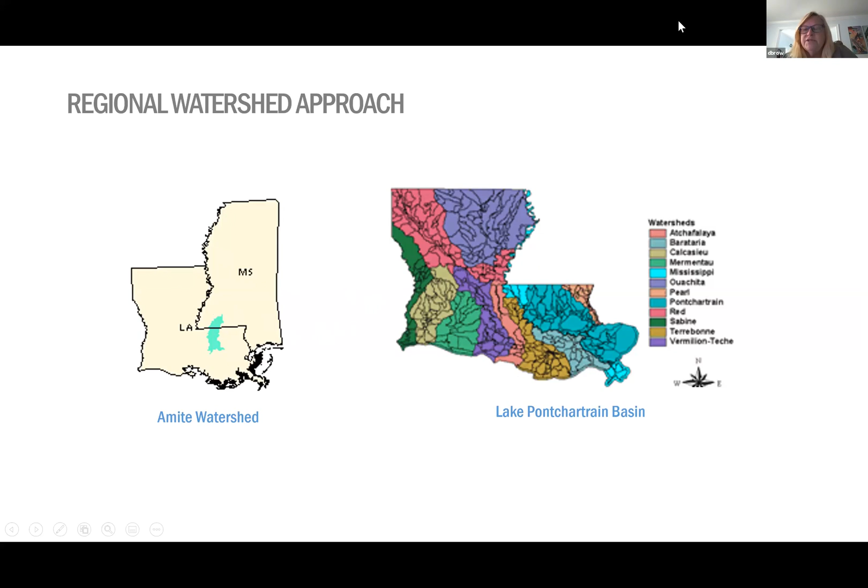And also that we're pumping into Lake Pontchartrain at the same time that Tangipahoa River, Tchefuncte River, Bayou Lacombe, everybody's draining into Lake Pontchartrain. So everybody's trying to, at the same time, that we're all having a storm, we're all trying to dump everything into this one water body, while at the same time, the entire basin is trying to drain into this one water body.

And if there's a storm surge or even high tides, that in itself can be a problem, and we never seem to talk about that. But I like to think about that big picture as well.

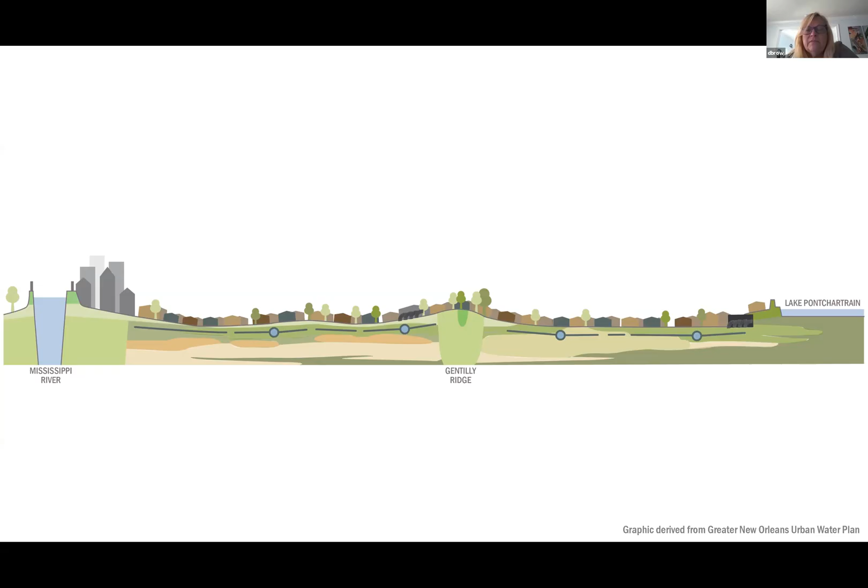And then I wanted us to see, just remind us, we all know this, that we're one of the reasons we're in a bowl is because we've walled ourselves off with all of these levees. And so they protect us, but they cause other kinds of problems.

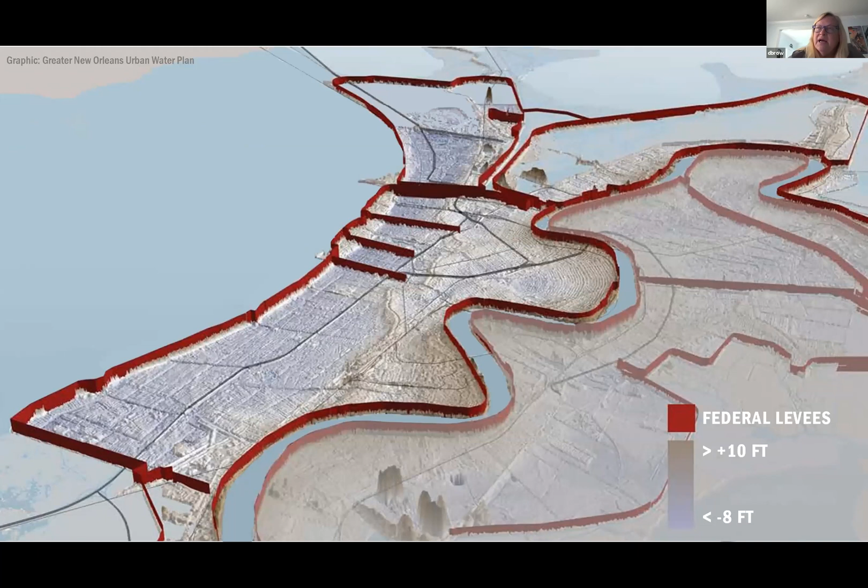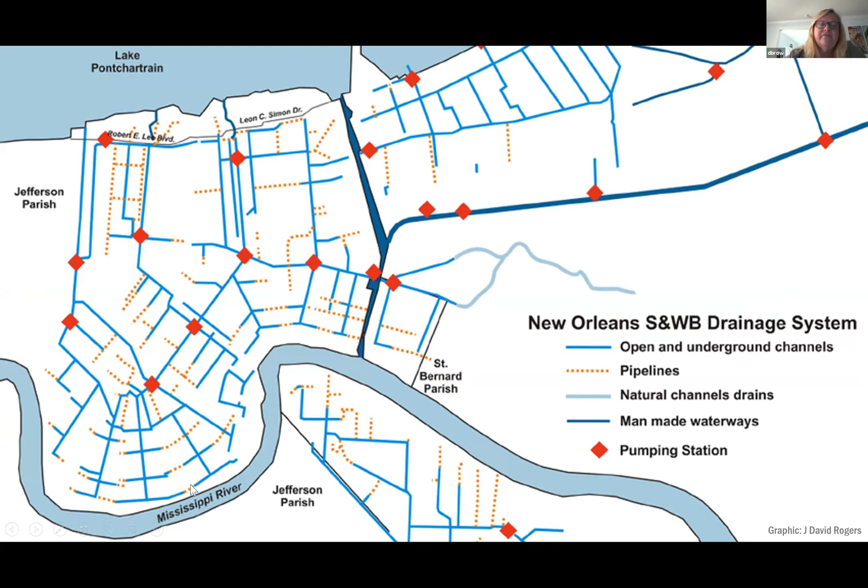Part of that is a disconnect, a lack of awareness of water, difficulty getting to water and seeing water. And then we have our elaborate Sewerage and Water Board drainage system here in New Orleans. I took out a slide showing how many miles of pipe there are, but this is just showing the main pipes. These diamonds are pumping stations. Interestingly, except for a small exception, we pump everything from the river to the lake. That will come into play in a bit.

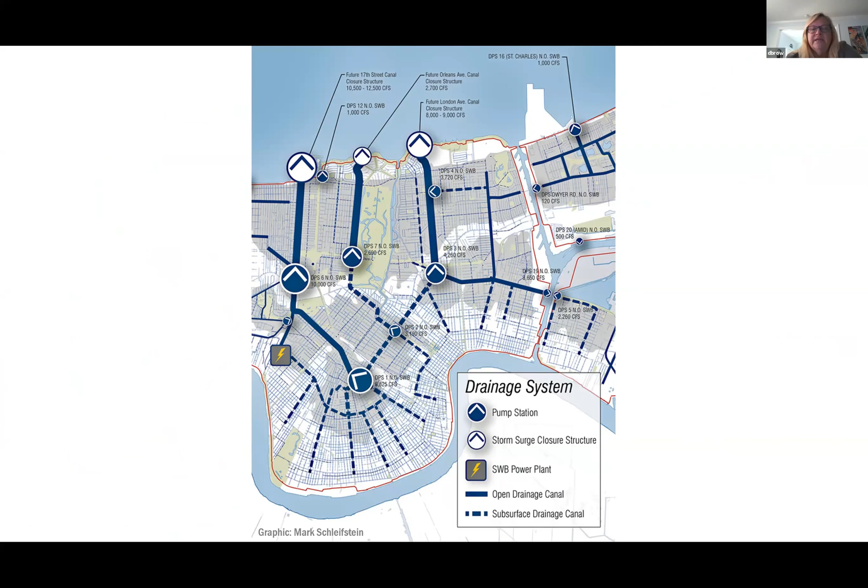Here's another diagram of that, and you can see all the little pipes in the thin blue lines. It's an amazing piece of infrastructure, but it's also not very handsome. I'm being polite - it's powerful, it can be awe-inspiring, but it's not aspirational in any way. It doesn't make me feel rejuvenated. It makes me think, wow, we spend all that money on such ugly looking stuff. Does it have to be that ugly? But then, I'm a landscape architect.

I didn't introduce myself - I am a landscape architect and a certified planner. I went to LSU for undergrad and graduate school in landscape architecture, and also graduate school in landscape architecture at Harvard. I've been doing this work for 41 years, and I'm from New Orleans, born in the Upper Ninth Ward.

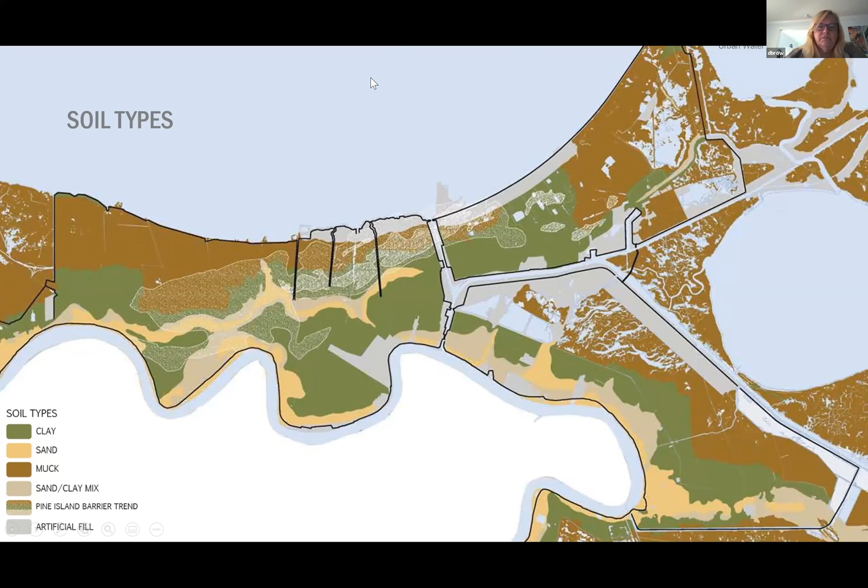The peat layer, being organic soil, has a great opportunity to subside. So our soils are clay, sand, and organic. We do have those little ridges or trends of sand. A lot of it is clay, but a lot is peat or organic material that, when exposed to oxygen, chemically reduces in size, not just physically. Clay soil is more like a sponge - it's your kitchen sink. You haven't washed dishes lately and it dried out. Now you wash dishes again and when it gets wet, it expands. Clay does that.

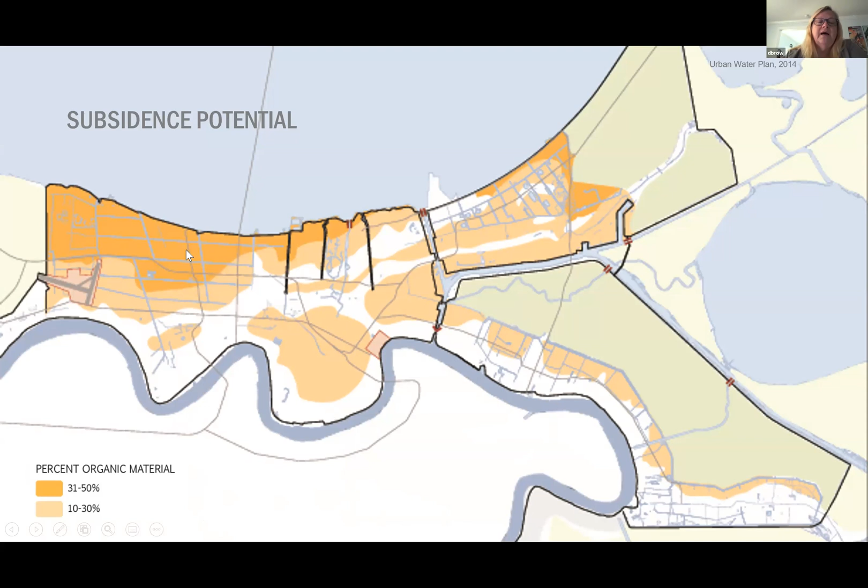So in a 10-year storm, we've been getting 10-year storms, several every year, and 500-year storms and 100-year storms. I hope everybody really understands how much the changing precipitation intensities and frequencies are, it's just phenomenal how much it's changing. All of our models are still based upon what was mapped on an isopleth map about 80 or 90 years ago. Hopefully NOAA is looking at coming up with new maps that show what a 10-year storm is in each area. Here, the first hour of a 10-year storm is about 3.5 inches of water, and 24 hours is about 9.5 inches, plus or minus. This morning we had 4 inches of water in 1 hour, so it was greater than a 10-year storm.

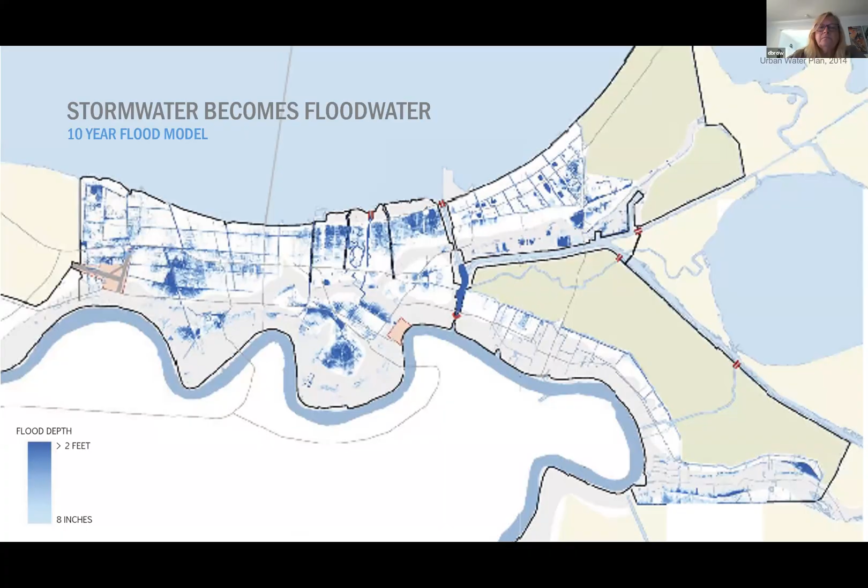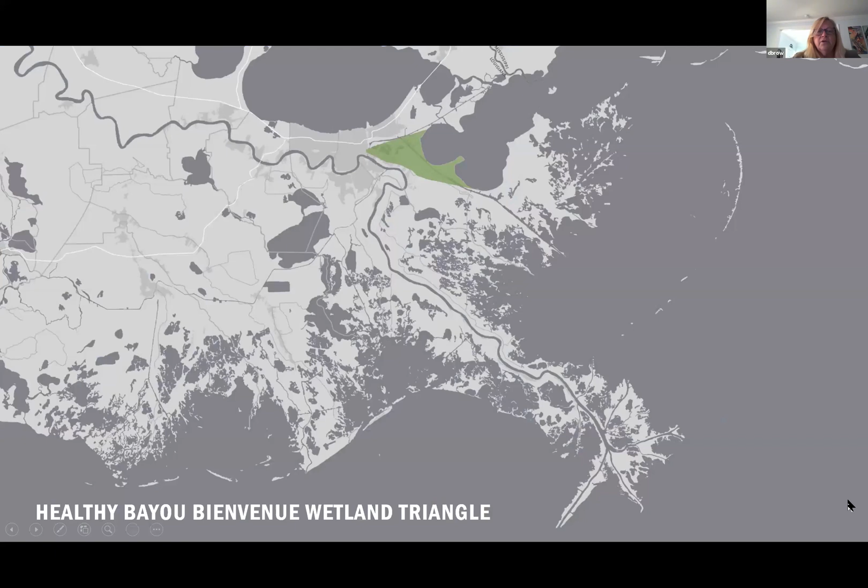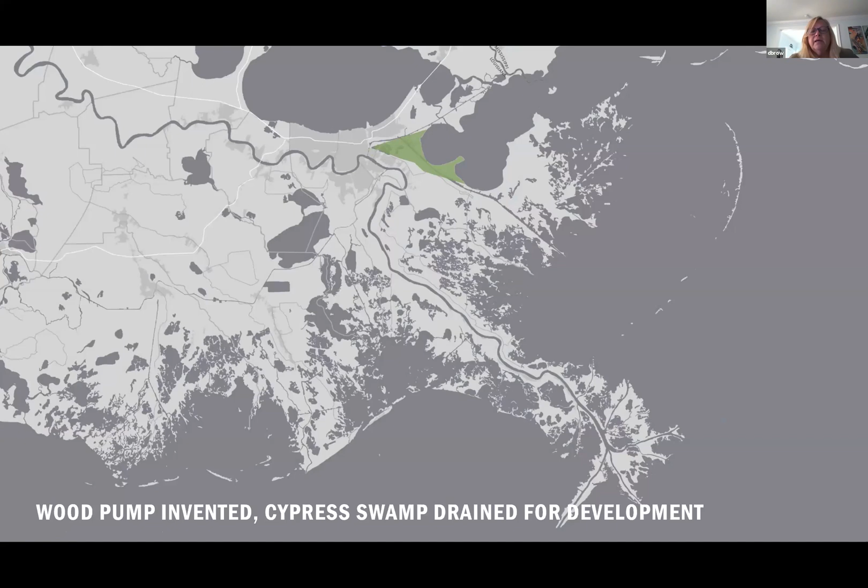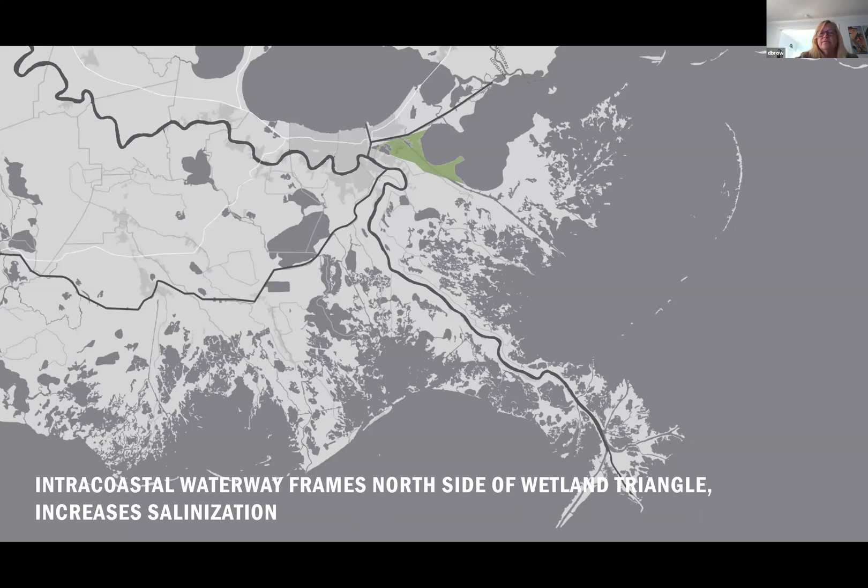Just a little context, and I'll do this quickly. We had Mississippi River distributaries, and I'm sure other people presenting to you will cover this in a much better way than I would. Then we added the levees that ended the distributaries. I wanted to show you Bayou Bienvenue and what it used to be, and a little history about it. There's the healthy wetland triangle that was up there. Then we started to pump because they invented the wood pump, and the cypress swamps were drained, and they started to levee the Mississippi River, and the canals and other waterways were built that increases salinization.

Pardon? I think we had somebody just joining in with us. We do have a question though in the chat. If I can stop you just for a second.

Dana, I apologize, of course my dog was going to start jingle belling all over the place. So we have a question that says, can you explain historical reasons why we haven't implemented more pump to river, and whether or not that's even a good idea?

No, it's a really good question. We don't pump to the river because primarily it's higher. The river's higher, and then on top of that is the levee. So the cost of getting it up over to the higher ground and over the levee is expensive, because the higher land is at the river, which is different than, say, the North Shore. The land along rivers there is the lower land, but here it's the higher land because of the sediment that used to be deposited along the river when it overflowed its banks. That higher land then naturally slopes towards the lake. So it would make sense in a lot of ways to drain to the river where it's closer, but you're still pumping uphill and then over the levee as well. That's the main reason why.

The Mississippi River has, since at least 1927, been thought of as the threat to us. So it's very difficult to win any kind of concept that involves penetrating that levee wall or levee, does that make sense? Flood wall or levee, but that's why. It was natural drainage mostly, and then we started putting in the pumps. The fear of the Mississippi River made us not want to touch that. Plus, Corps of Engineers is always fun to work with, sorry if there's someone here who works there.

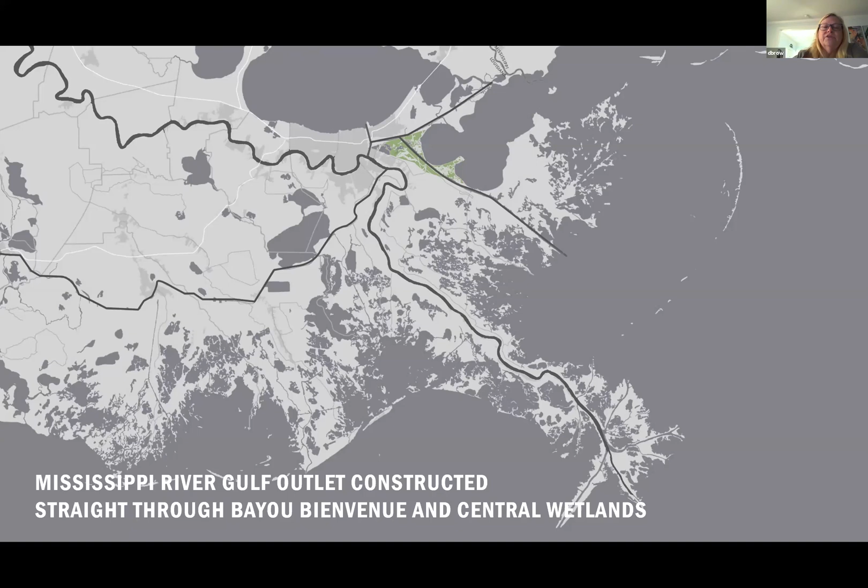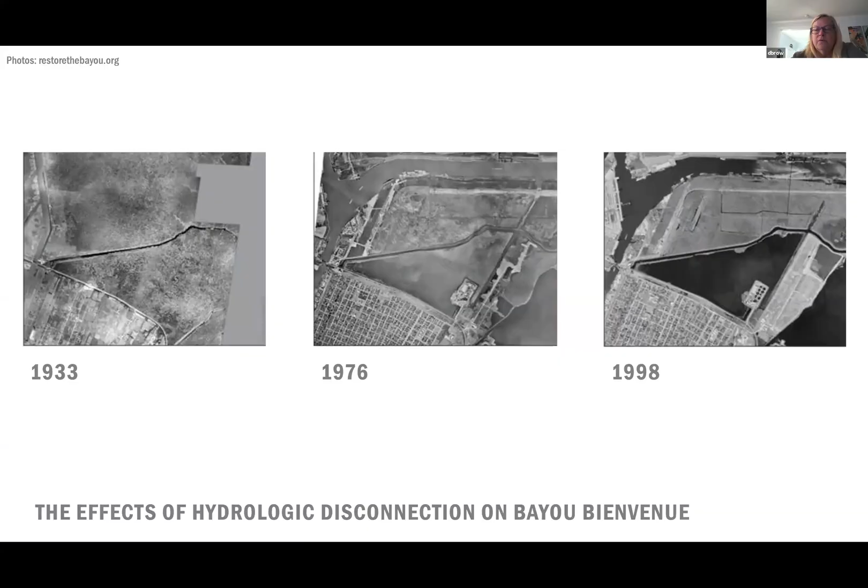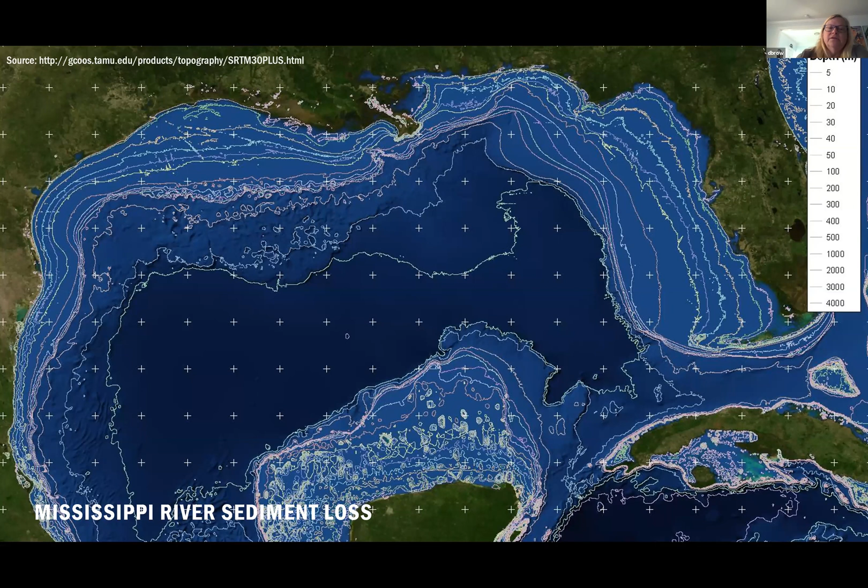Anyway, look at the green in Bayou Bienvenue and the central wetlands and how much they degraded. Here you can see a series of pictures, 1933, '76, and '98, and you could see it just disappeared, it's like we've got the receipts on what caused it. That's the hydrological disconnection that I want to make a theme of some of what we're talking about today. That freshwater supply loss meant we then started losing that natural sediment to the end of the Bird's Foot Delta and depositing all that great sediment into the Gulf instead. You can see it really well here. Then the saltwater intrusion kills cypresses and a lot of the habitat there, so that happens when you're not flushing it with fresh water.

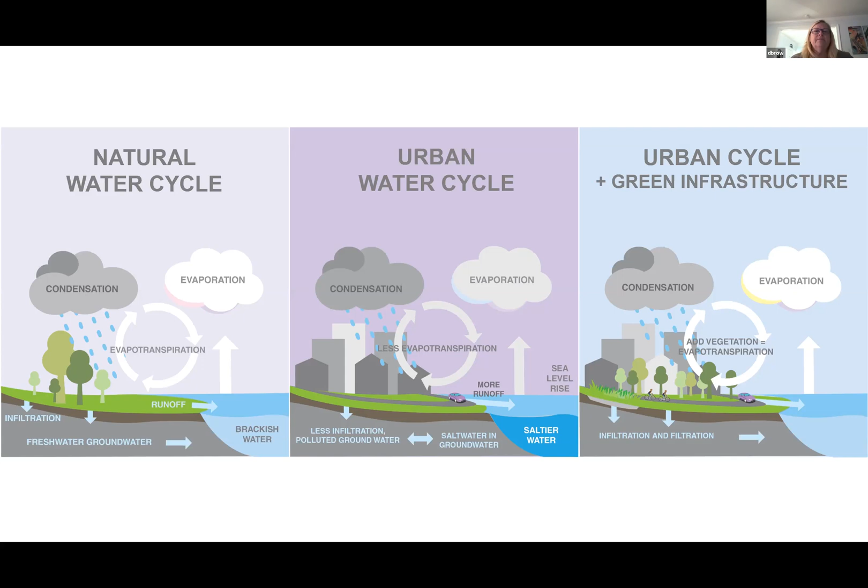So we need to be a lot more aware of this. People don't know that if I took this whole screen and said that represents all the water on Earth, I would probably take about a half square inch and say that's the amount of fresh water available to us as humans to live and fertilize crops and, unfortunately, operate industrial processes. We use fresh drinking water for that as well. People are usually not aware of that. It's something to think about.

So natural hydrology, I don't want to dwell on it, but you just have to think back to 8th grade. There's a lot of evapotranspiration, but it's a cycle.

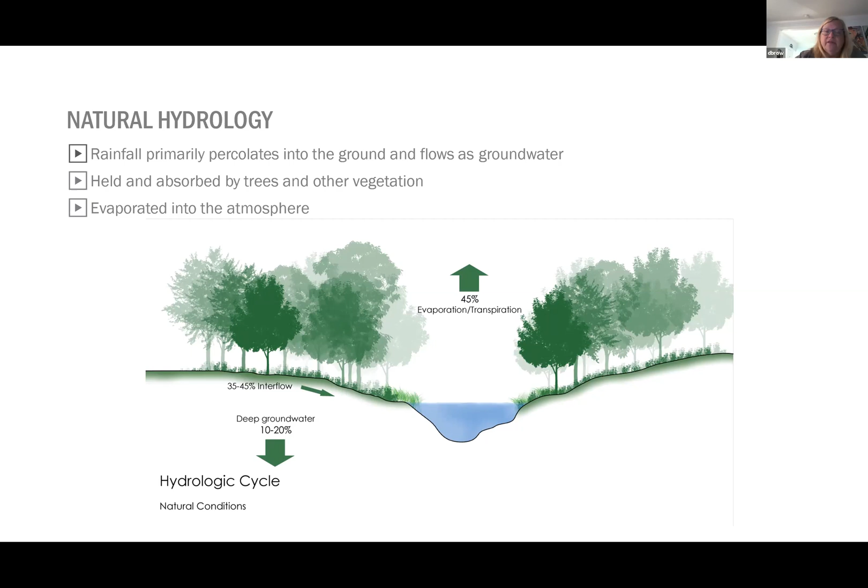That's the main thing. And the traditional approach, instead of having these natural kinds of banks of rivers or bayous, we have these canals that we concrete line, then we put up a fence, because the way we did the trapezoidal channel design, it's unsafe. If you fall in it, you probably can't get out and you're going to drown. So we have to put up a fence.

It's just like we keep doing things about drainage with blinders on. The only purpose of this canal, as it's designed right here, is just to hold water and move it as fast as possible. And we don't care about anything else. That's a very myopic way of looking at our infrastructure, but that's how we've been doing it for a very long time.

And you clear out vegetation, and they don't want any vegetation because that's going to slow the water down. A lot of times it's concrete-lined and impermeable. Looks beautiful, like Monticello Canal, just beautiful kinds of infrastructure - that's my sarcasm, if you can't see my face. And no percolation in the ground increases runoff even more.

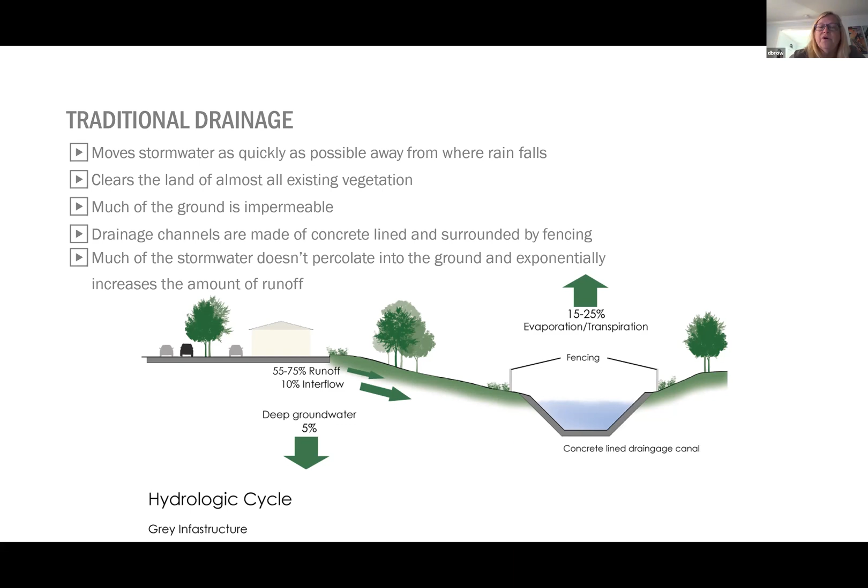So the traditional approach, right? Same thing, even right at your house there: get the water off your property, get it into an inlet and into a drain, and get it into that canal or some other kind of water body.

Here's a couple of important things, and I'm going to get into one of them a little bit more deeply: with the kind of rainfall we have always had here in this region of the country, not to mention how the intensity has increased and the frequency is sort of very unpredictable - more drought, then lots of rain, lots of rain, lots of rain, then drought - we can't afford all the pipes and catch basins and pumps it would take for a traditional approach to be effective. We can't afford that. We've proven it because we can't even afford what we have now.

And plus it's ugly, so we don't want to do that. The environments that it would create would be incredibly ugly. And again, I believe very much in a human's environment having so much to do with how they are able to function in the world, whether it's on a daily basis or in a bigger picture. I'm not going to get too philosophical on you, but we could have coffee another time and talk about it.

But words matter to me a great deal. Words matter. And engineers - I've worked with engineers who totally get this and have changed their ways - we're all trying to change our ways because we all looked at it the same way: there's some ponding on my property, I want that water off of my property, get it out of here, there's ponding, there's water getting up to my steps. And I always ask, well, is it in your house?

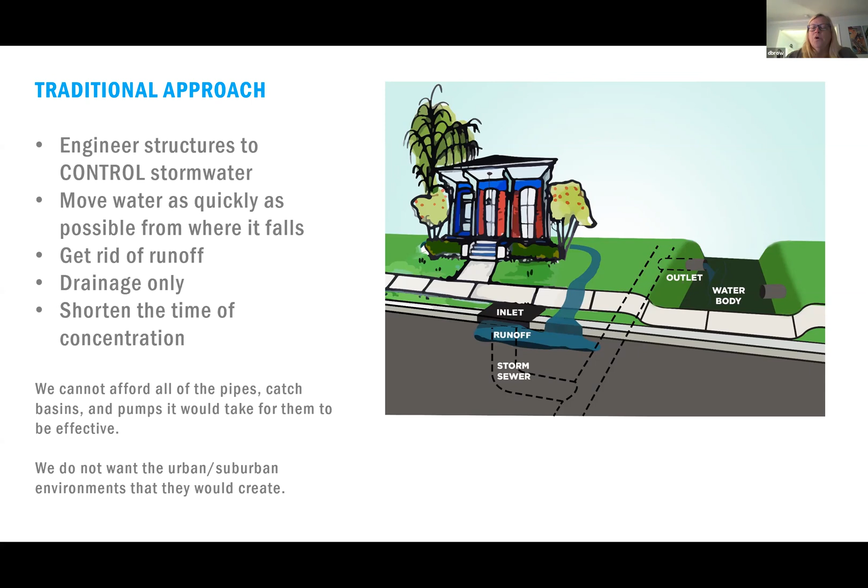So instead of moving water as quickly as possible from where it falls, we want to hold the water as close as we can to where it falls. So that's where we come into stormwater management, and I liken it to having children.

If you have children, you really don't control them. You may think you do, but you don't. You really manage your life around them. Like, okay, he's got to go to Little League practice and I've got to bring her to ballet, I've got to do this, you're just running around like crazy trying to keep everything working properly. That's what stormwater management is. It's more flexible, and hopefully that'll be clearer as we go along.

But you want to use natural systems as much as possible. Maintain existing trees instead of doing what we typically do, particularly in suburban areas where we clear cut everything. And like we've got this blank canvas now? Yes, you've got a blank canvas where you totally destroyed the existing hydrology, and there was existing hydrology, existing vegetation, and soils. And all three of those...

...contribute to managing water better. You need to minimize impervious surfaces. There's no reason why, every time you look around, the standards seem to change, saying that the road lanes have to be wider. Somebody gets in an accident, so oh no, oh my goodness, let's make the road lanes wider. And now we're using highway standards on local roads.

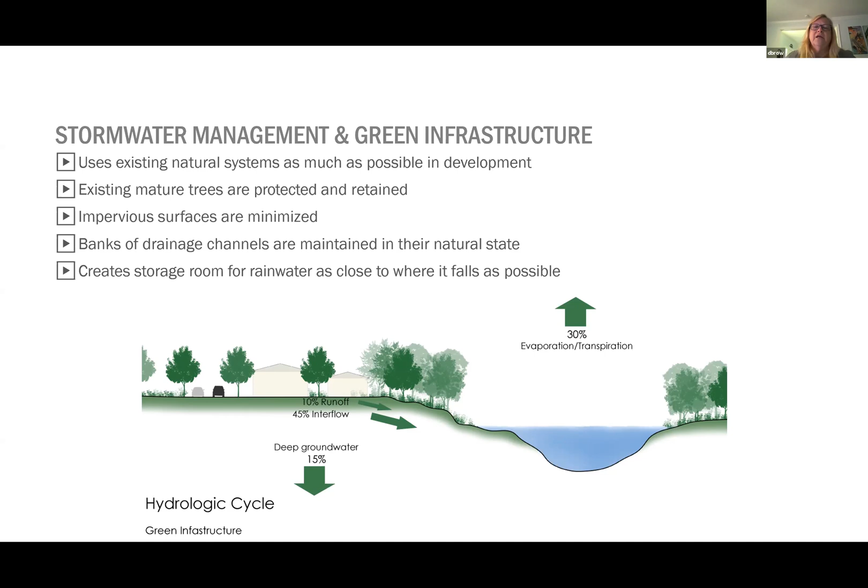And you want to maintain drainage channels, or man-made ones, in more of a natural state instead of an engineered, artificial state. You're really trying to create room for water as close to where it falls as possible. That is the cheapest thing you can do and the most effective thing you can do. And when do those two things collide? I mean, come together? Rarely. Is the most effective thing also the most cost-effective thing?

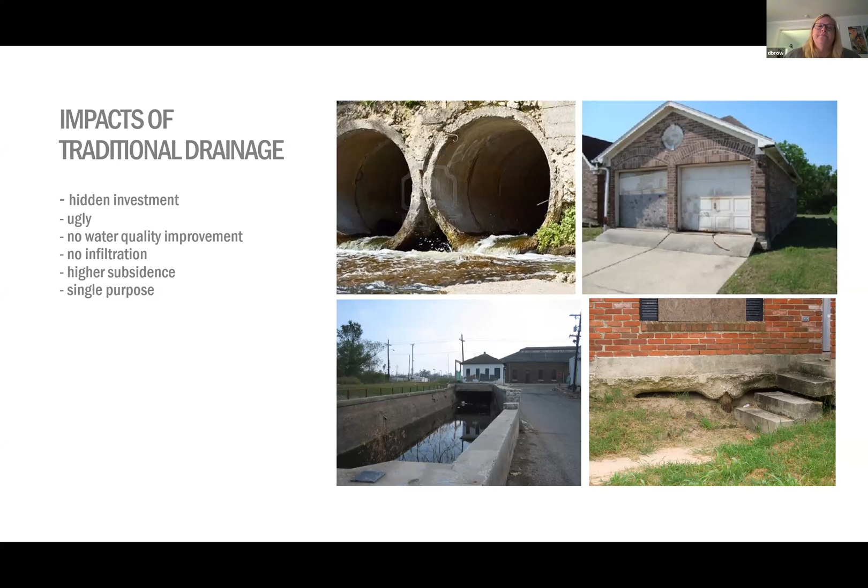So here are just some of the things you know already. Here's some subsidence and the ugly infrastructure. And the reason why the subsidence occurs is not only because we're not putting the water back in the ground. A lot of times we pump too much and we keep pumping, and we're actually sort of vacuuming the water out of the soil, and that's going to cause the subsidence.

And the cost comparison to fix traditional drainage infrastructure is really incredibly expensive, to build it but also to repair it. One of the main reasons is you can't see what's going on. You can't even find the problem without digging up or putting in expensive cameras to find out why this isn't draining. And then you've got to dig up things to fix it.

Right at this time, I usually do a small skit where I am a clogged pipe, but I can't do that online, so just imagine it and laugh later. But because almost all the infrastructure is underground, it's invisible to us. And when it's invisible, then maintenance needs are invisible. And we all definitely know we neglect maintenance here.

Not every place in the world neglects it as much as we do, but we have to also admit that we are a poor city. We do not have huge revenue sources from big corporations that have their headquarters here, we just don't have that kind of municipal revenue. So what gets neglected is generally what isn't seen, and that just makes repairs even more expensive later.

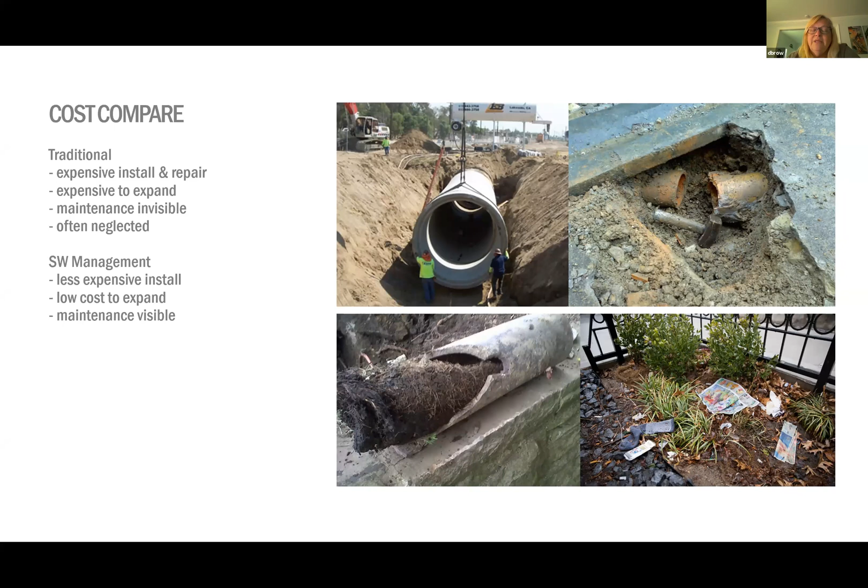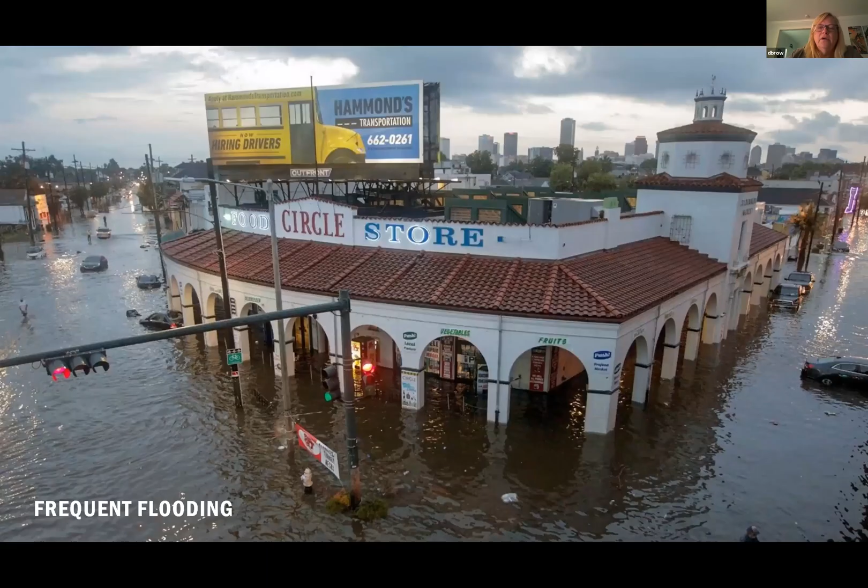The other thing I mentioned, awareness and disconnect. We have these kind of flood walls around our canals, and you can be walking your dog there and you don't even know there's water there. You can't sense there's water there. Part of that disconnect, part of that lack of awareness, that invisibility, also makes us not understand what's really going on with water in this city. Everybody's seen that slide, I'm sure.

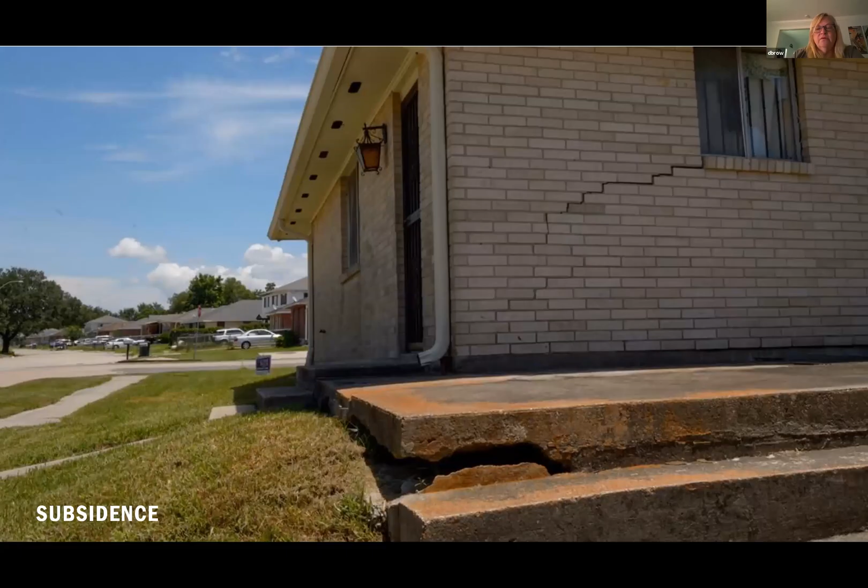But the maintenance is constant and it's very expensive, and we just simply don't do it until there's a problem. And water pollution is a big issue.

If you don't know, when it hasn't rained in a while, the streets, parking lots and rooftops have collected a decent amount of pollutants on a road, a parking lot, or even your driveway. It's gasoline and oil and brake fluids and pieces of tires and even metal engine blocks. I used to fix my own cars years ago, and you know, you had to replace the gasket, take it all apart and put a new one in.

Well, where'd the gasket go? Where'd the rubber go when the tires wore out? Where did all that stuff go? Where did the metal go when my engine block was really deteriorating? Well, it didn't go to Mars, it went on the ground. It may be microscopic, but it's there.

And so it sits there and builds up until the rain comes. And that first flush of rain, we call it a first flush because it's flushing those pollutants off the surfaces of roofs and impervious surfaces of all kinds and collects all of that. And that ends up in Lake Pontchartrain unless we filter it first. And we don't, of course, with a sewage treatment system. That would be ridiculously expensive.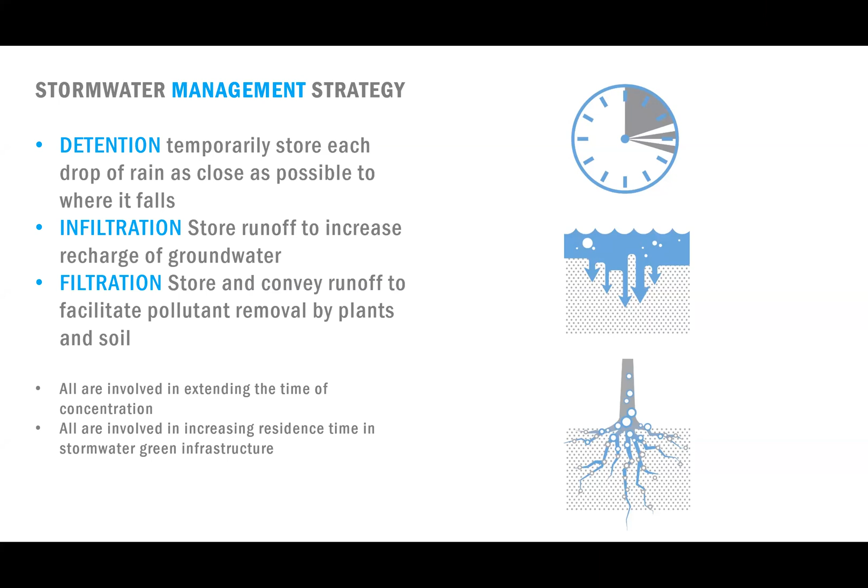And very efficiently, very effectively, it removes pollutants out of that water. But it can't effectively do that if the water doesn't have what we call residence time - time to sit there and be treated, time to infiltrate into the ground. And so if you're detaining water, while it's being detained, some is infiltrated, some is filtered, some of that maybe even evaporates.

So that actually, even when it is released into the pipe system, there's a whole lot less of it, because some of it infiltrated into the ground, and some was taken up by plants. A mature cypress can take - and I've seen different studies - 2,600 gallons of water a day if the water is sent to it. Live oaks can take up even more, believe it or not, if the water is sent their way.

But instead, we generally drain the water away from trees, say in a parking lot, and then we wonder why the trees don't do well.

So what you're doing by detaining is you're increasing residence time, extending the time of concentration. You're holding some of that water back while the other water drains.

The analogy I like to use is the on-ramp on I-10 when everybody gets off work and it's backed up. It's hard to get on the Claiborne overpass or the Claiborne Expressway, and they now have ramp meters at some of the ramps, because everybody's trying to get on at one time. If people got off work at 4:30, and then some at 4:45, and then some at 5 and 5:15, every 15 minutes or so, then that would not be the backup. It would flow better - wouldn't be perfect, but it would flow better.

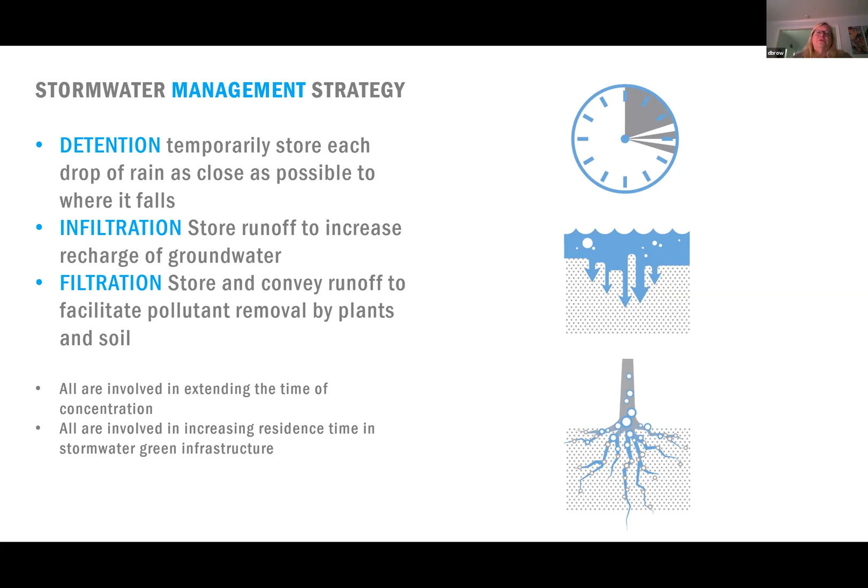Whereas stormwater management, green infrastructure is an open system, and I'll try to bring that home to you now. Green infrastructure mimics natural hydrology. It's detaining the water, so it's not trying to hold it permanently, but some infiltrates into the ground. Plants and soil microbes—it's amazing how well they clean even heavy metals out of water.

The great thing about it is it's applicable at any scale. We're doing some things in a parish—I'm not going to mention the parish because I don't want somebody else to come take my work from me—but we're doing some big projects there. It's big, just areas that are basically open land, and we're going to bring water out of the river onto that land to detain it for a while.

So those are huge. And it's not like the retention basins they do on the North Shore in St. Tammany Parish. I tend to find those to be too engineered.

But you can do it at any scale, or you can do it at this scale right here, where there's a little French drain on the side and then a bioswale in the middle. And there are multiple benefits. This is the most important part about it compared to a traditional drainage approach.

Besides recharging groundwater and therefore reducing soil subsidence, you're increasing urban habitat because you don't use anything but native or highly naturalized plants—or as the Louisiana, New Orleans Native Plant Initiative calls it, sometimes 'nativars.' You use plants that are natives, basically. And plants that are native are adapted here. They can deal with the drought, they can deal with a ton of water, and you've got to plant the right plant in the right place.

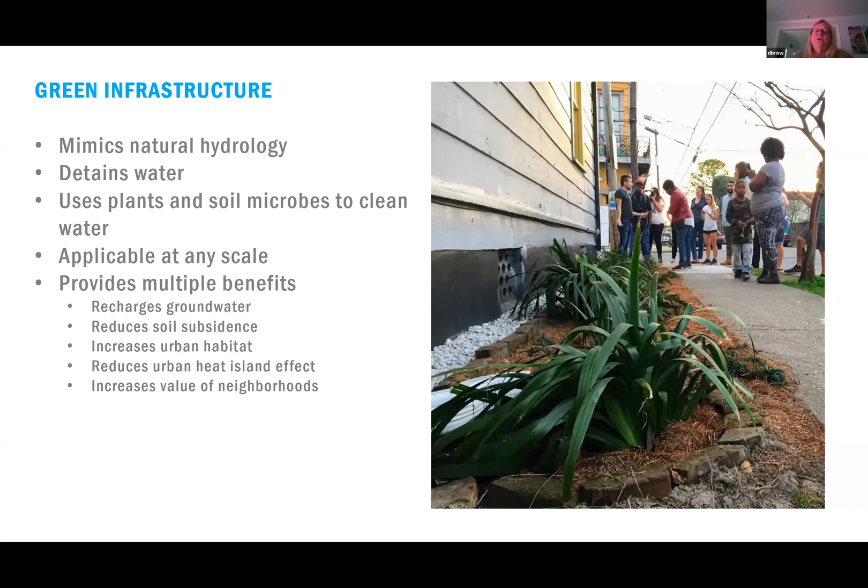And it increases the value of neighborhoods as well. There's other things it does—air quality, plants sequester carbon. It's better for community design and just a sense of community.

You can build it incrementally. I can build a small rain garden and then next year go expand it. If you try to do that with a pipe—say I just put in a 24-inch pipe—the only way to expand that pipe is you got to dig it up and put in a bigger one. And then, what is that pipe connected to? Maybe now the next pipe can't handle it, so you'd have to dig that one up too, because it's a closed system.

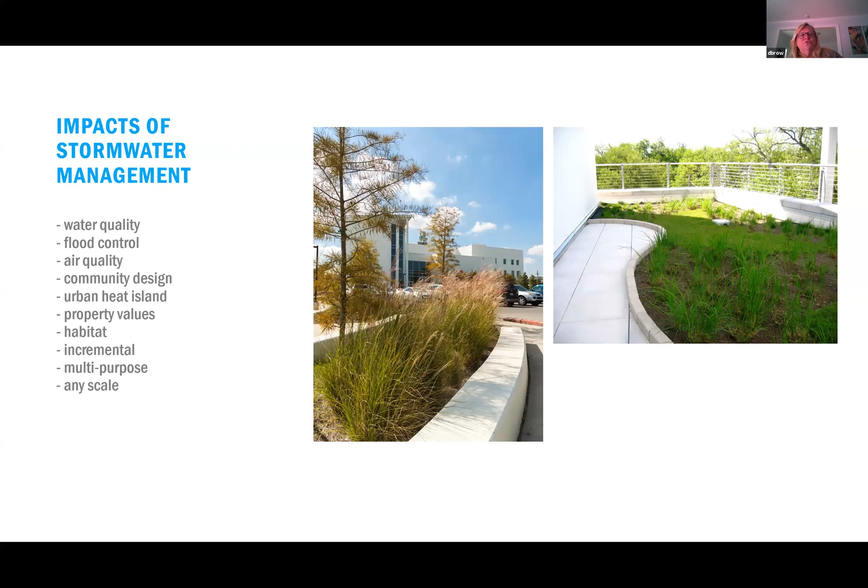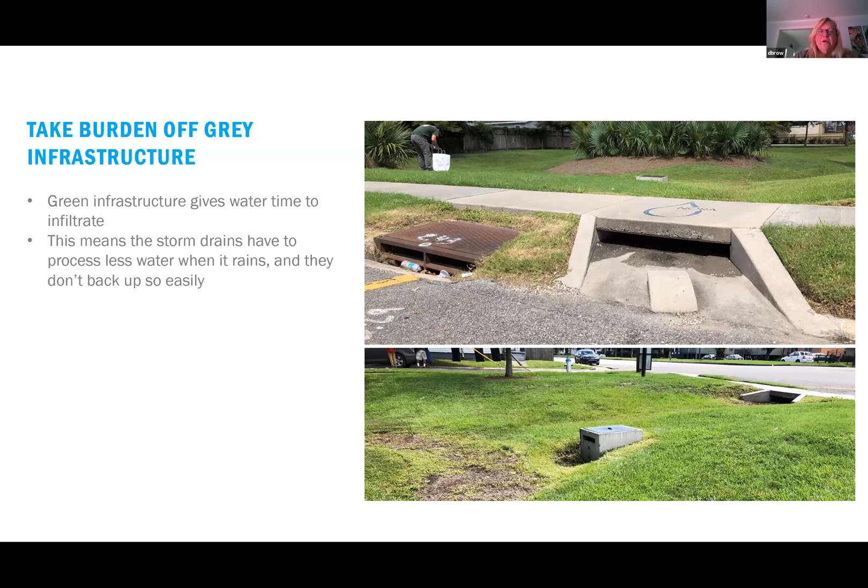What green infrastructure does, it doesn't replace gray infrastructure, which is what I call traditional infrastructure. It takes the burden off of it. Okay, I'm going to show you - it reduces flood risk.

Bioretention cells and bioswales - the bio is that it biologically retains pollutants. That's what the word bioretention cells comes from, and that's what I like to use. We call what we design bioretention cells. They always have an outlet back to a pipe system, whereas a rain garden in front of someone's house or backyard usually does not have a connection back because it's too difficult and costly to connect back.

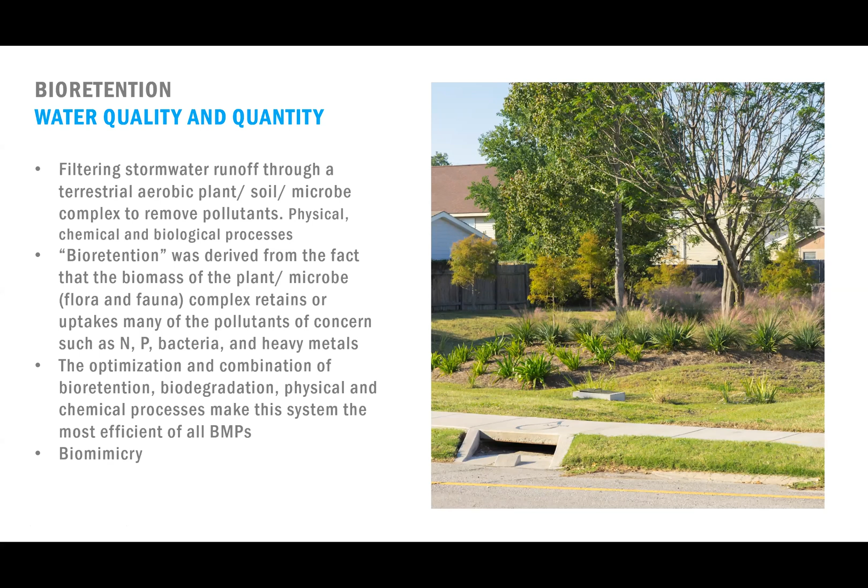If you're interested, there's a book called Biomimicry. The name is listed at the bottom. It's a bit of a hard read, but it's pretty cool to learn about how other things can be used - how we can mimic other things in nature.

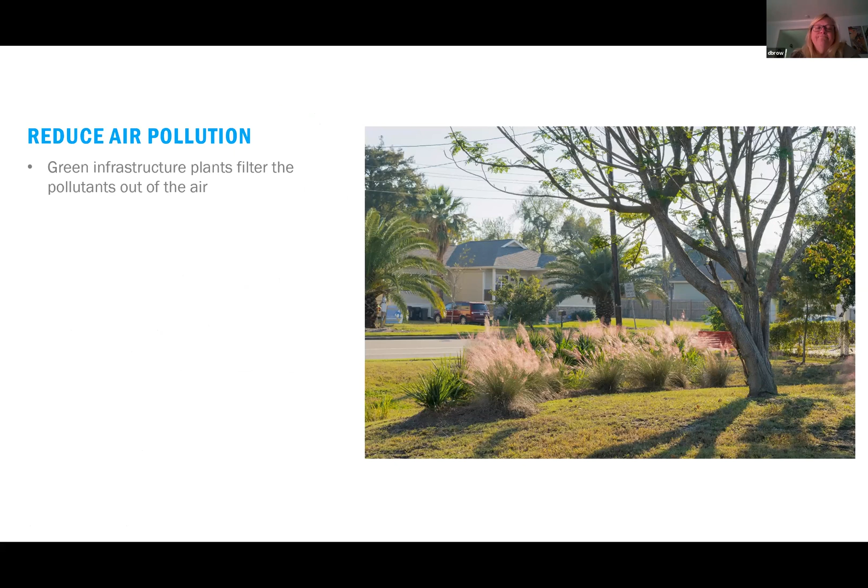Water quality, I've talked about that, the air pollution and sequestering. There's air pollution - look how clean the sky looks after these rains, right? This afternoon, if you looked outside, look how clear and beautiful it was. The rain washed pollution out of the air. Where did that go? It went onto impervious surfaces and once again was flushed out.

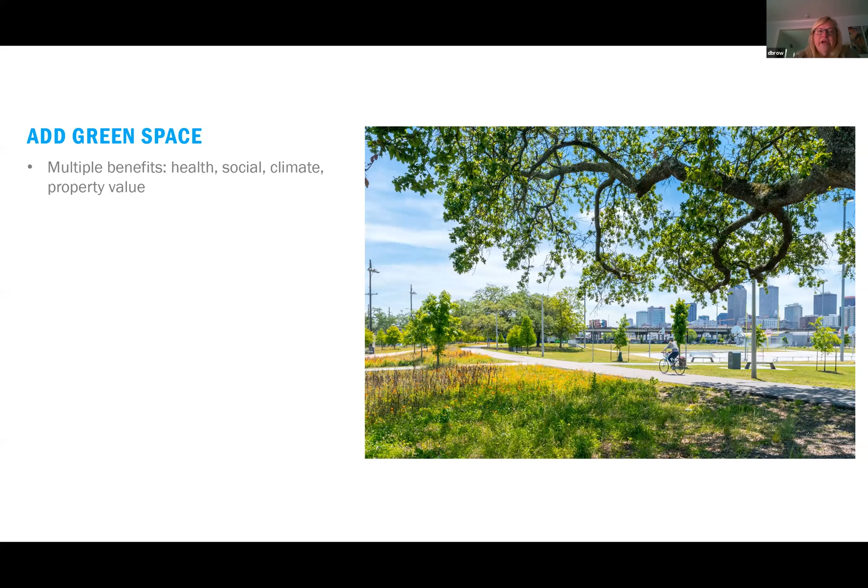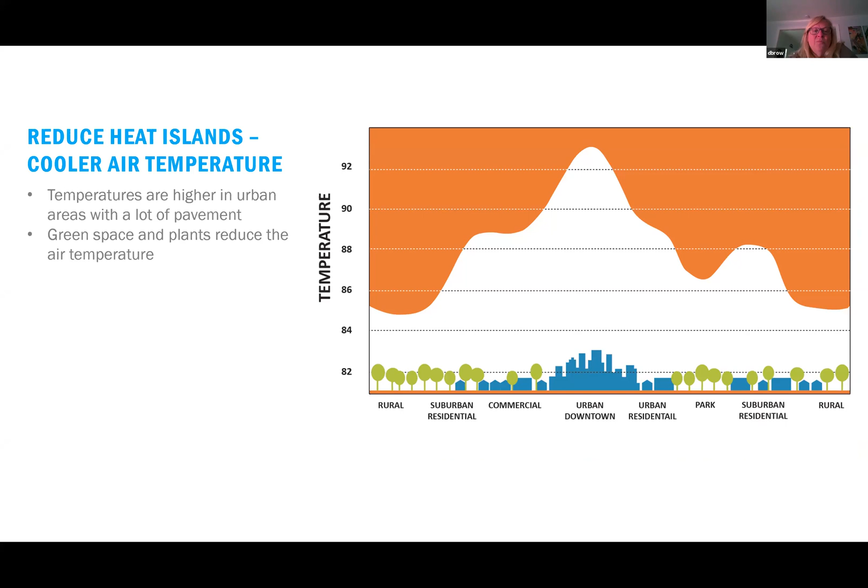Green space has multiple benefits, and we don't have enough green space in this city. We have a couple of really huge areas, but need more green space that isn't necessarily a park, or could be. That's a diagram of the urban heat island effect, where green space and plants reduce the air temperature compared to an urban area.

So let's talk about some types of green infrastructure. I mentioned rain gardens - basically, if you want to know where to put a rain garden in your yard, go look at where the water collects and just put it there, dig it deeper, put some sandy soil with a little bit of compost, and plant native plants.

A bioswale is just like that, but it's linear. So it's actually used to convey water from one area to another, like a pipe, but it's an open system, right? I'm not the biggest fan of detention basins, but I've designed them because they tend to just be grass that gets mowed, and grass doesn't do for water quality or groundwater infiltration what native plants do.

Here on the left is a stormwater planter. I'll show you some French drains, rain barrels. This is pervious paving on the right - that's at my house, I had massive quantities of it put in - and infiltration columns, and then trees.

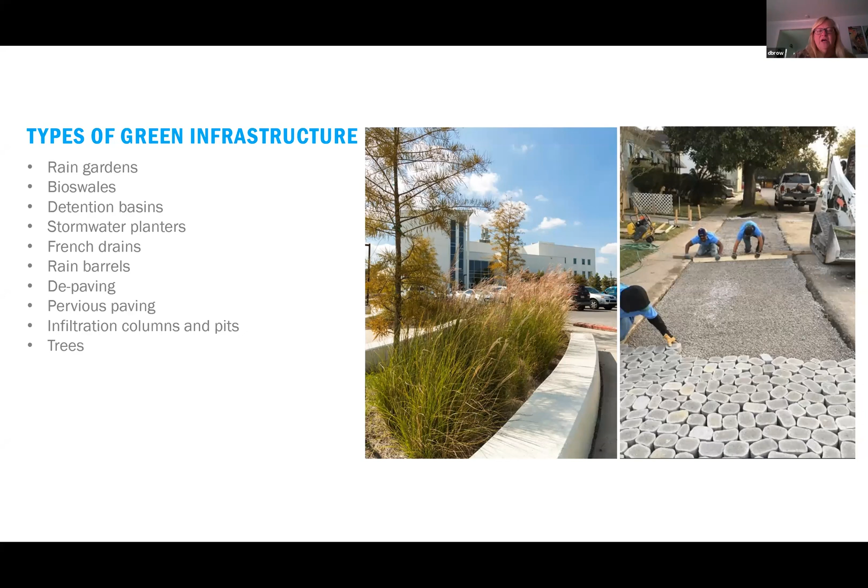So when we talk about plants, we need to think about whether it's a rain garden or a bioswale or bioretention cell - the lower part, where it's going to stay wet more, is like a lower riparian area where you need to pick plants that like that. And there's a middle riparian area and an upper one that might get their feet wet briefly and could handle that. In this rendering it's like muhly grass, but it's not going to want to sit in water.

So native plants also send their roots a lot deeper. Let's go back to our soils, right? We have clay soils here. Everybody says it's all clay soils, and they do infiltration tests - we have to do infiltration tests before our projects are designed. But that infiltration test of how quickly water goes into the ground is at one point in time. It's a static point in time.

When we plant - and my office is doing a lot of tests and monitoring on this right now - when you plant native plants, their roots get deep right through that clay soil. They pipe through it with their roots, which brings air and water into the soil, and it fundamentally changes the characteristics of that soil. It also attracts microbes, and so now you have a higher infiltration rate. I can't seem to get people to understand that one, but I'm going to prove it one day, with data, but that's what's happening.

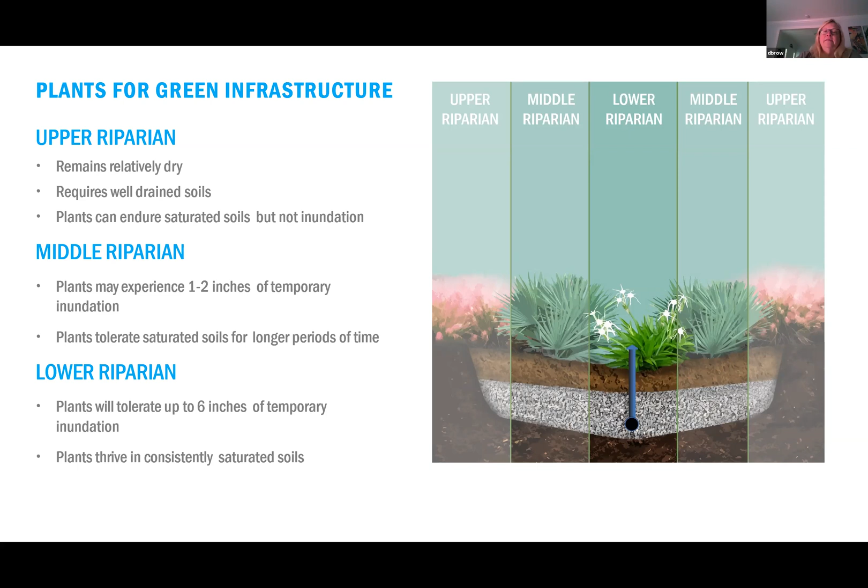So that's in my house, that rain garden. What I want to point out is along the side of the house where the downspouts are is a French drain. It has a pervious pipe toward the bottom, and that bends and dumps into this rain garden. So I'm getting the water off the roof and putting it in the rain garden, and then other water flows into the rain garden as well.

Native plants, and that's a red swamp maple, my favorite tree in all the world. There it is again on the right. Here's a different one on the left.

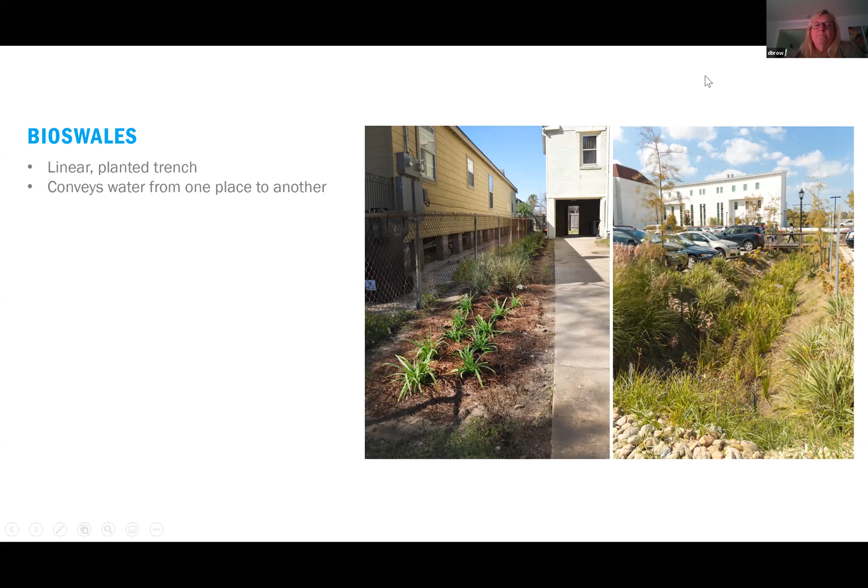This is a bioswale, remember I said it's linear. This one on the left in the back, those are in the native palmetto, and we built this five years ago. Those native palmettos are huge now, they are so happy. The house on the left was draining onto the property on the right, such that the driveway was full of water and they couldn't get out of their car without getting their feet wet. So we put this in, and they've never had that problem again. You could put bioswales in a parking lot like that.

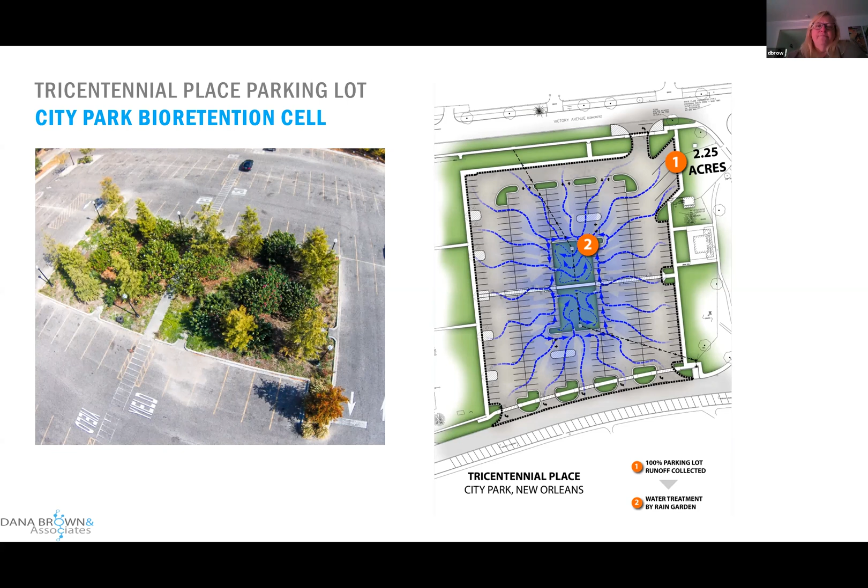I'll skip a few things. This is a giant bioretention cell in the parking lot at City Park, where the old tennis courts used to be, behind the museum. And that's what that looks like usually. It's a lot of maintenance, we get in there and help maintain it.

These stormwater lots we've done for the Redevelopment Authority are actually mostly detention basins, but we do plant them to some degree, and we're actually taking water off the street. You can see that runnel there is taking water off the street, and you can see the water going into the lot.

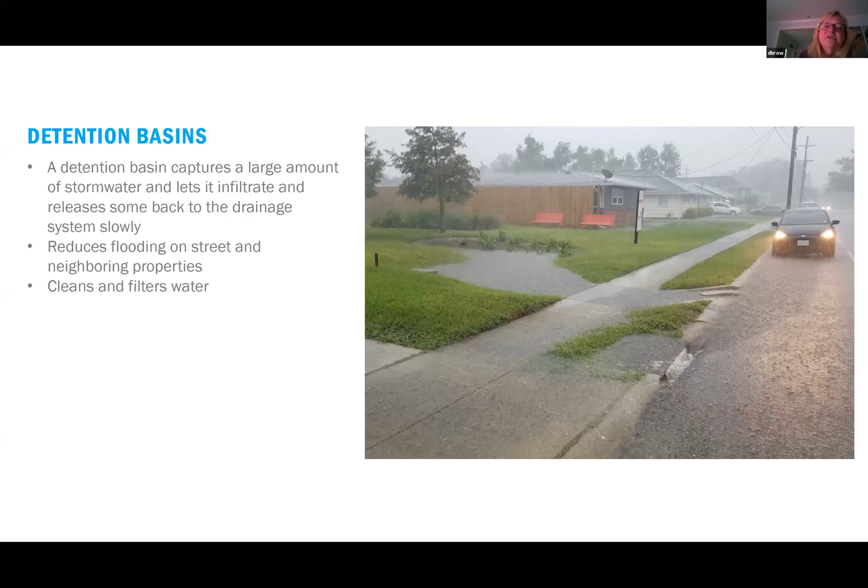In another project I'm going to show you in just a second, we not only take it off the surface of the street, we take it out of the pipe that's in the street and bring it into the lot and detain it. So that's what it looks like when it's not full of water. I think this is my video. Yeah, it fills up.

Stormwater planters, they could be any kind you want. Where you have narrow spaces and you can't really fit something in the ground or can't remove the concrete.

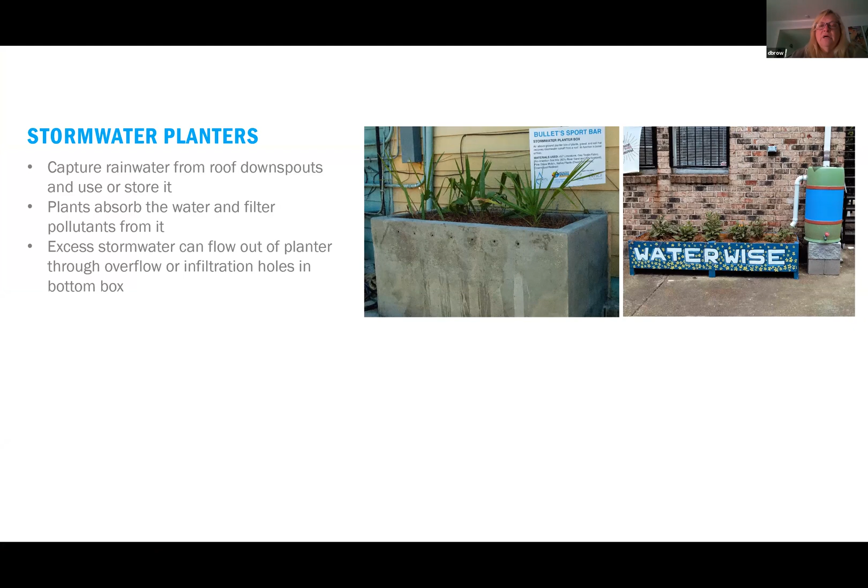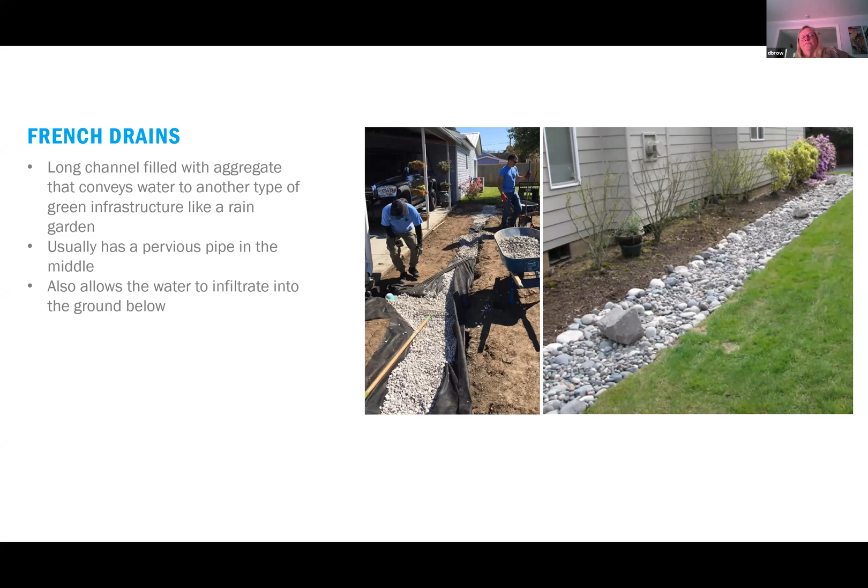That's a French drain right there being built on the left and one installed on the right. It's coarse rocks. I always put a 4-inch diameter pervious pipe in the bottom of it to help with storage and to help carry the water. You don't have to. And usually that dumps into a bioretention cell or a rain garden, or it connects back into the drainage system.

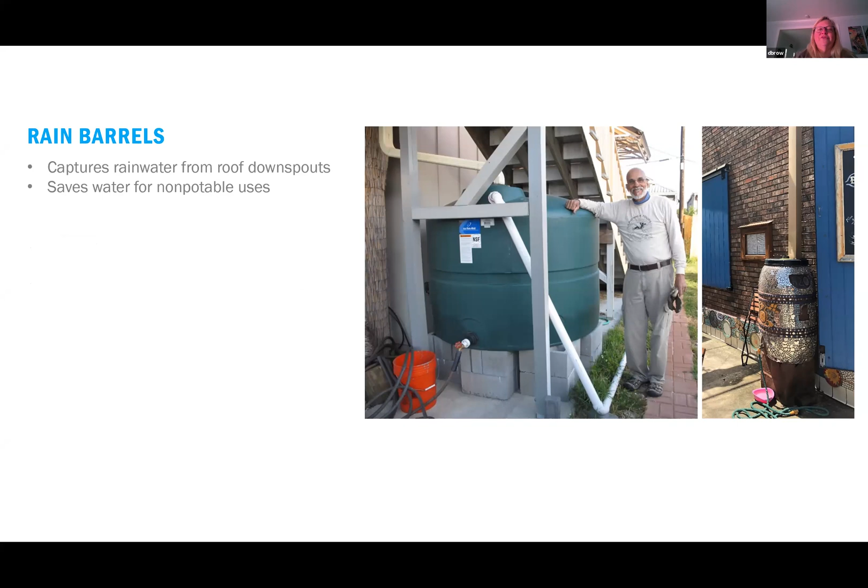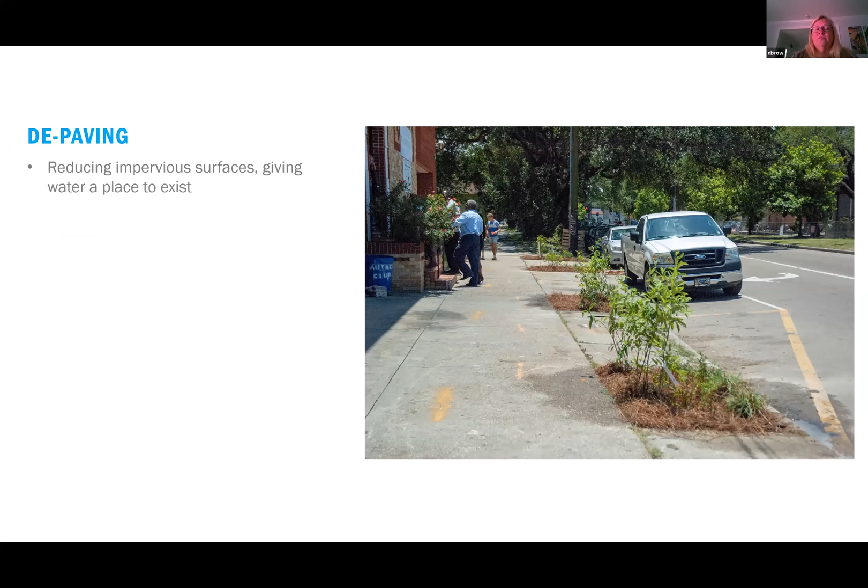You can get really big rain barrels and cisterns. De-paving is a really important thing to do. This is something we did at the Autocrat in the 7th Ward, where we took out some concrete and planted, because the water was draining from left to right. So we're at least catching some of it before it goes right into the street.

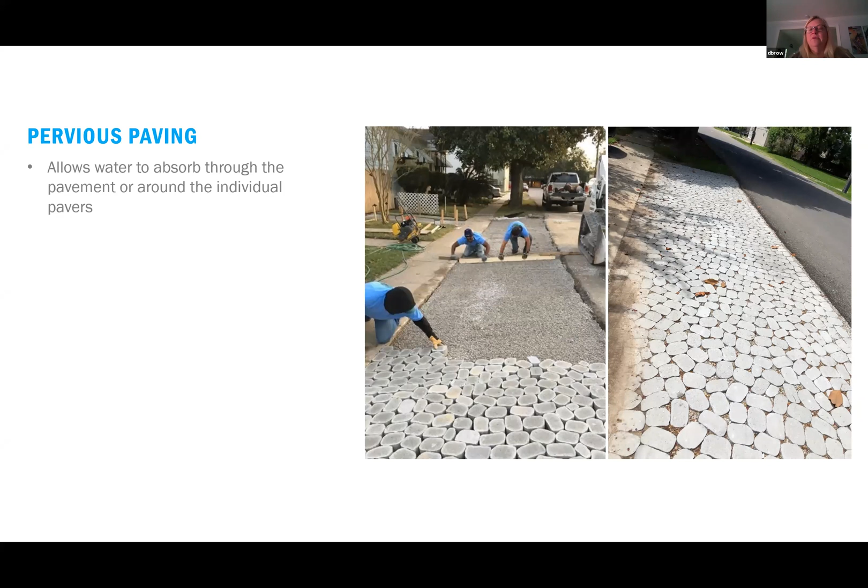Pervious paving, I showed you that. This is a type you've probably not seen, but people like this one because not everybody wants bricks or pavers, so I like this one that's sort of cobbly looking. I'm going to skip this because it's complicated to explain.

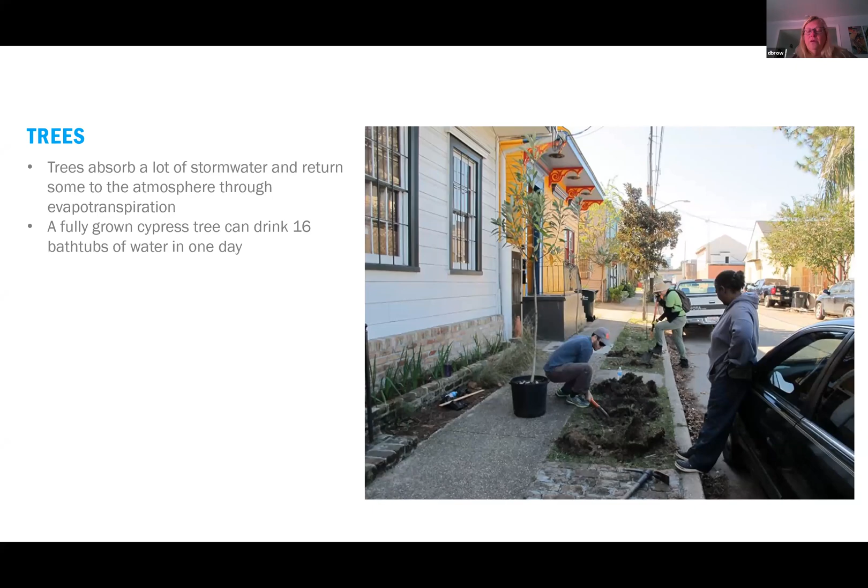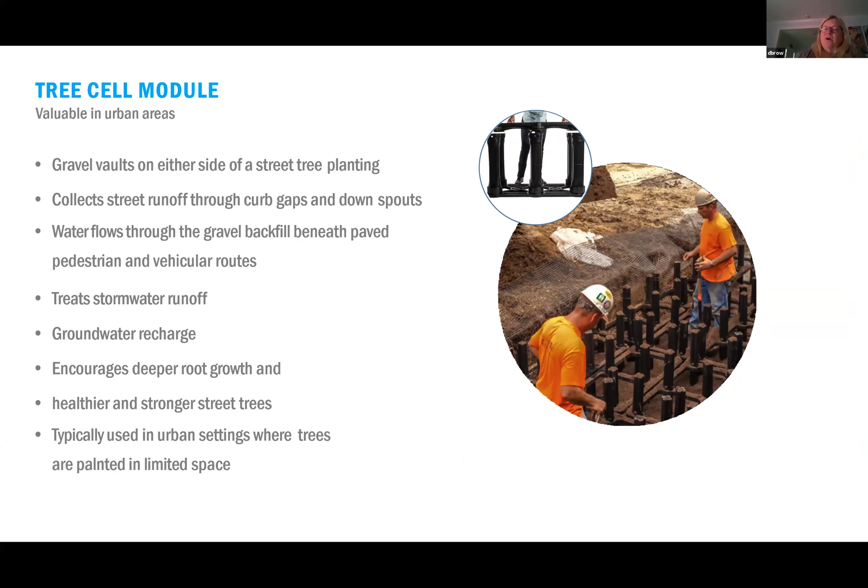So there's a tree cell module. There's one getting installed, right there on the right. They can be big, you can stack them, but they hold a lot of water. They're sort of like that septic tank you're thinking of putting underneath the ground in your yard.

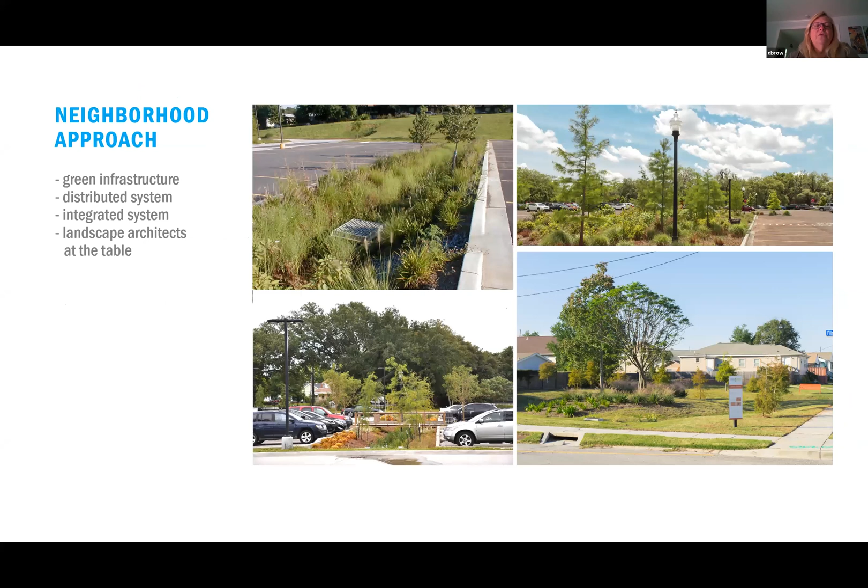The neighborhood approach, I think, is what's great about green infrastructure. It can be distributed.

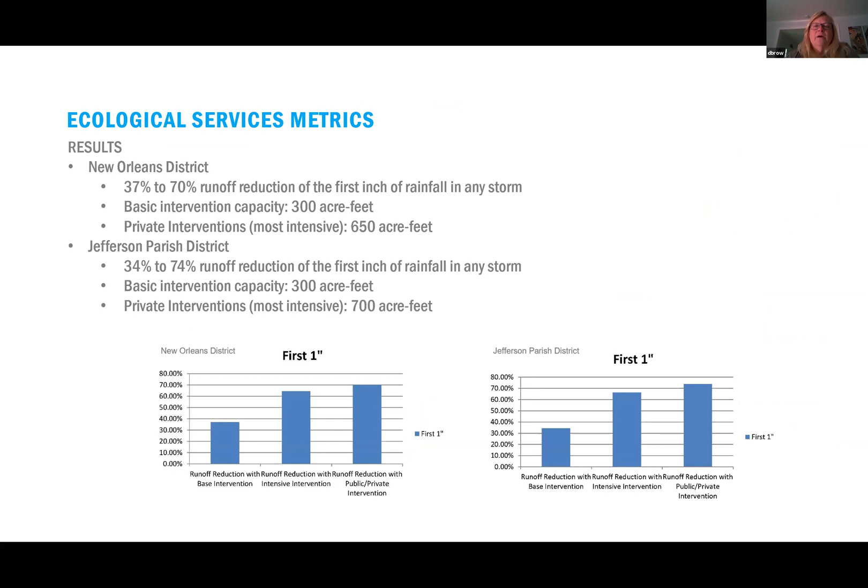I'm going to skip all these ecological services metrics we've done over the years, but I want to show you these projects. Can you guys see my mouse? I hope so. That's the Pontchartrain Park Gentilly Woods area, which is under construction right now.

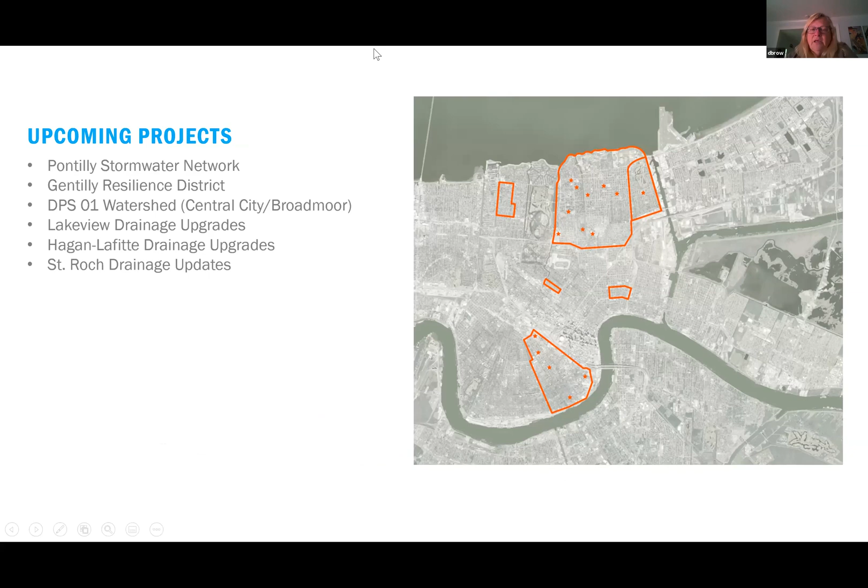It's $15 million of green infrastructure. This is the Gentilly Resilience District, and this is Broadmoor. So I'm going to talk about Broadmoor and Pontchartrain, Gentilly just briefly. The key thing is what it looks like on the left.

What we proposed, instead of digging some big thing and putting a bunch of water in a big retention basin, was a distributed green infrastructure system of stormwater lots, like the one I showed you in the video, plus pervious paving on the downslope side of streets, just for parking, pervious paving for parallel parking. That holds a lot of water underneath it because there's a lot of number 57 limestone or even coarser.

It has about a 35 to 40% void rate, so 1 cubic foot of it holds 4/10 of a cubic foot of water. And so we're storing water there.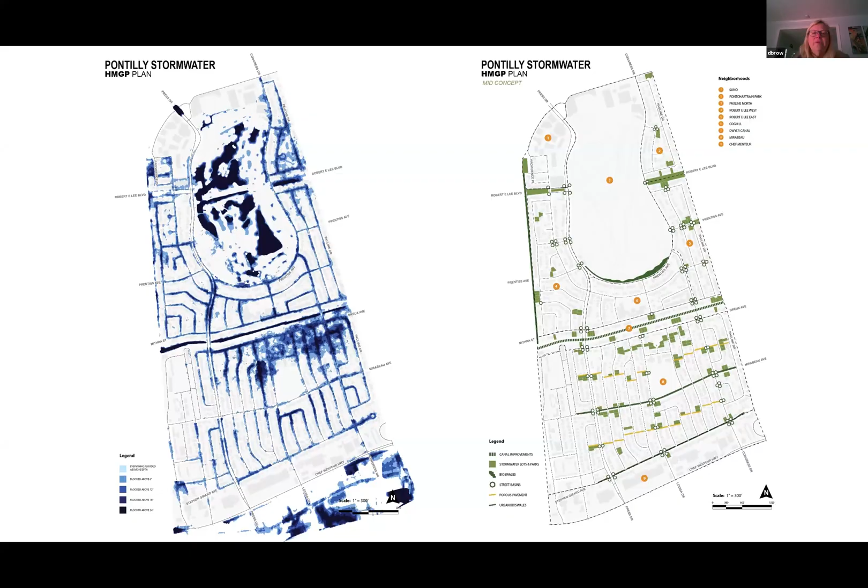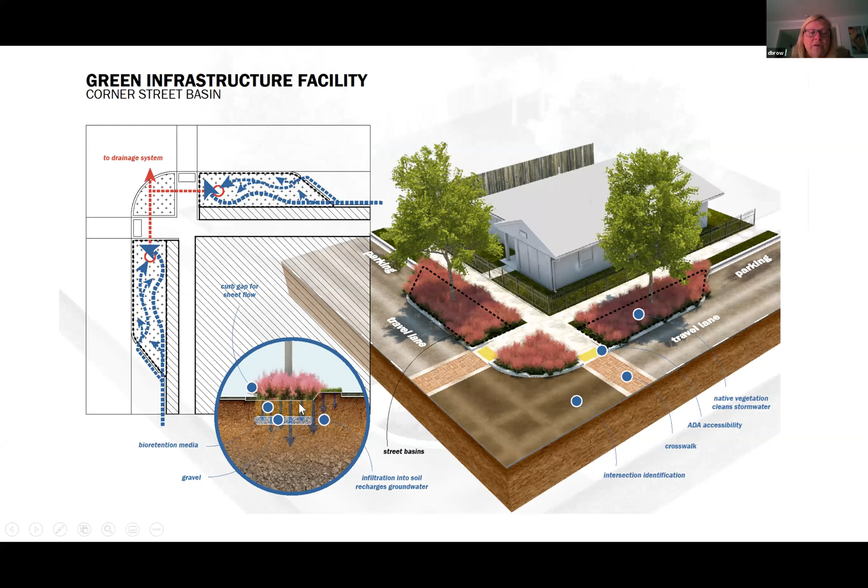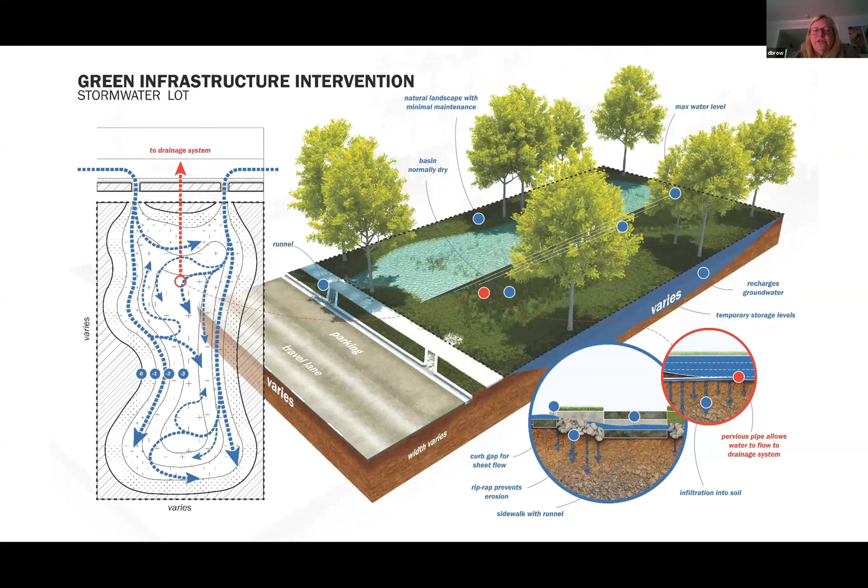I could talk about these all day, but I can't, right? Stormwater lot, I showed you that already. There's the big bioswale. And that's what it looked like before they did excavation. This was a rendering — I need to put in here the picture of what it looked like just excavated.

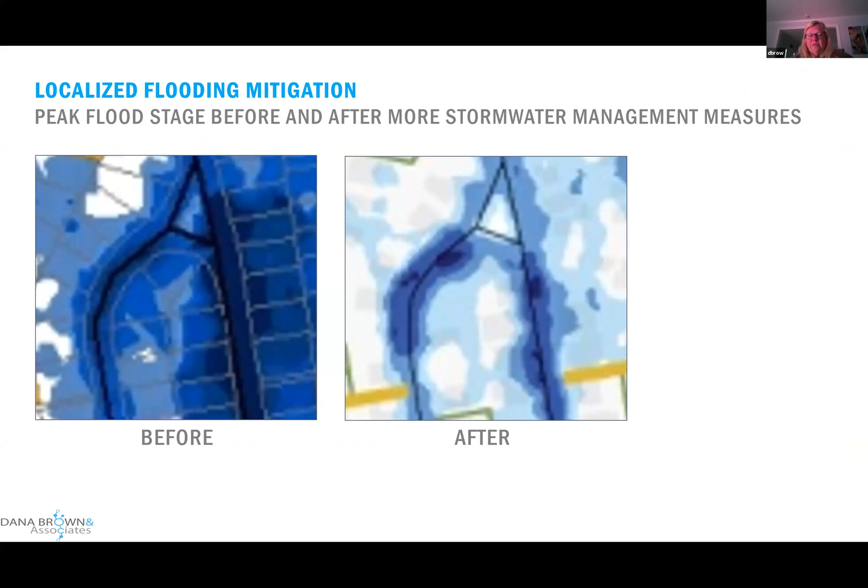So what I wanted to show you here is before and after, left and right, with just those distributed green infrastructure systems modeled. That's the difference in standing water — that's a big difference. We're doing the same in the project called Broadmoor.

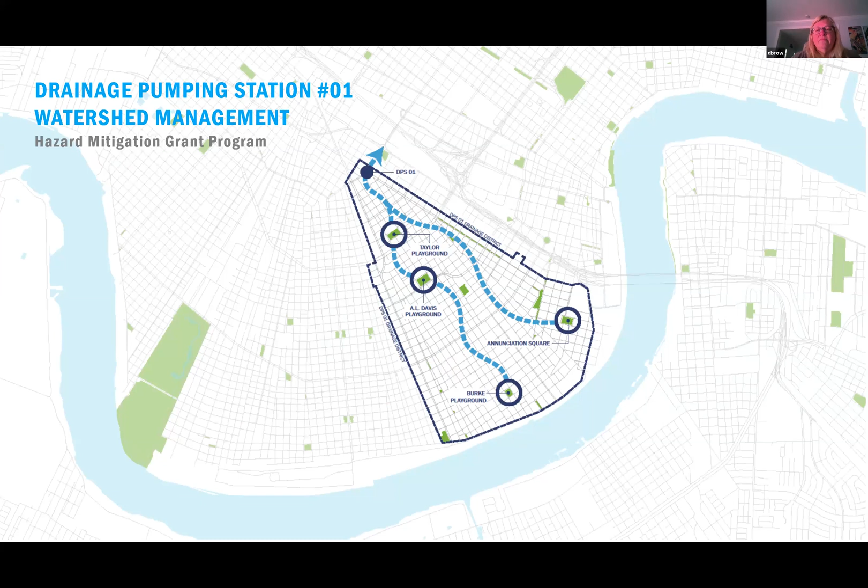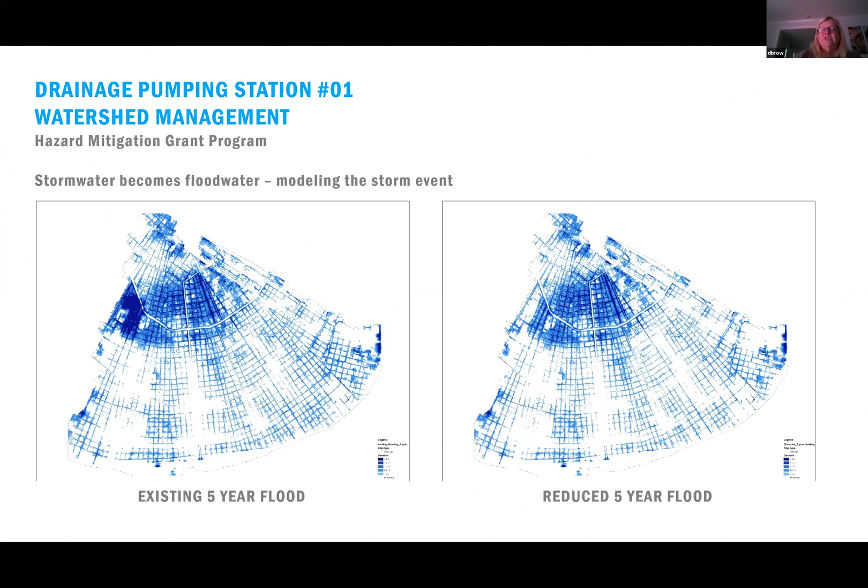It's now called Drainage Pump Station 01 because it wanted a sexier name. But actually the whole project's in Central City, so the Broadmoor name made no sense. Anyway, it's a distributed system just like in Pontchartrain, in Gentilly, and you can see the reduction — it actually reduces flooding in Central City and in Broadmoor. So that's the distributed system there.

And some of the same types of things. I'm not going to go any further because I know we want some questions. I have a little more to show you, but I think that's probably enough for today. I'm happy to answer any questions anybody has.

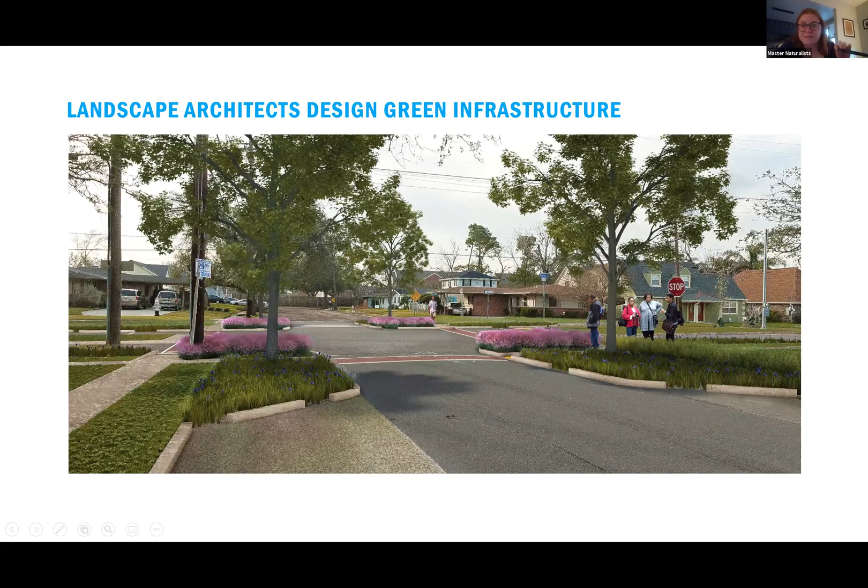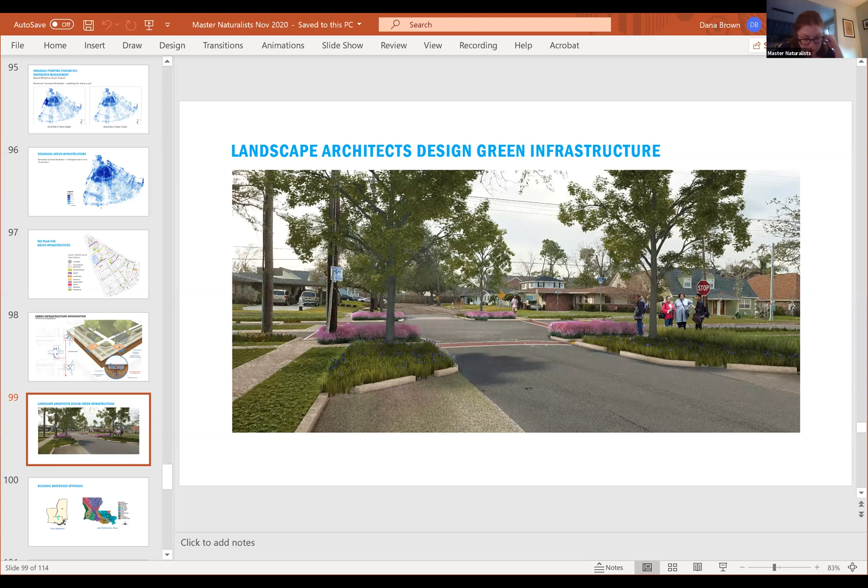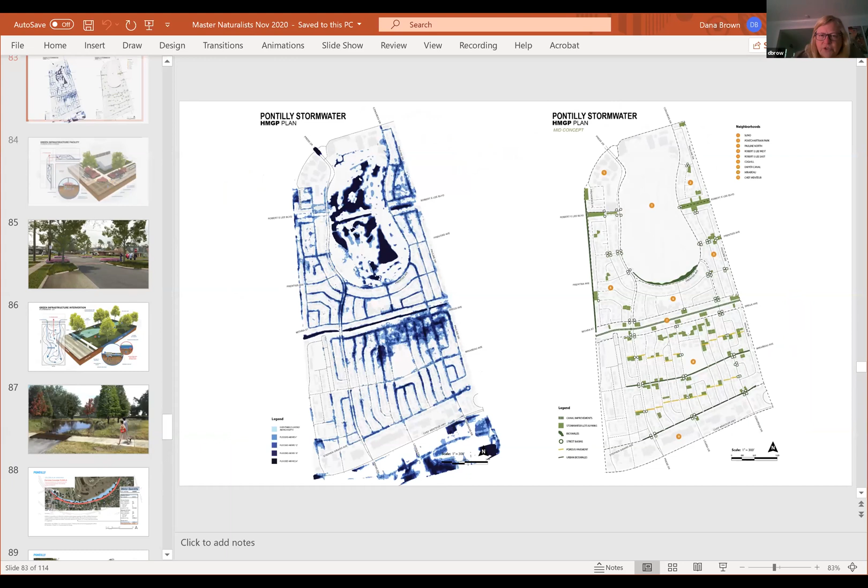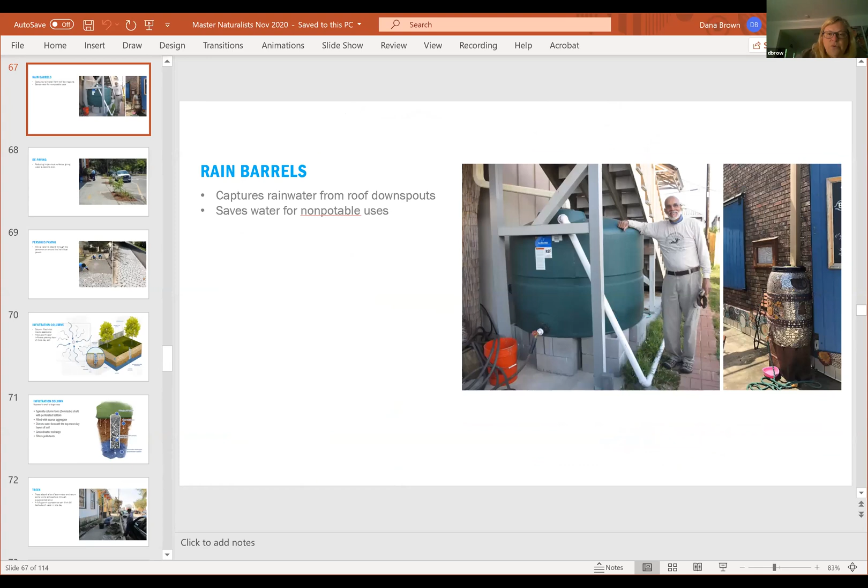Yes, at the point I took the picture, we did not have the downspout connected to it yet, but that's what the intent is. That's at — and all of you who know where this is, you're going to be giving yourself away — that's at Bullets Bar in the 7th Ward. The downspout is over here, and it has been connected to this. You can see these little weep holes at the top here.

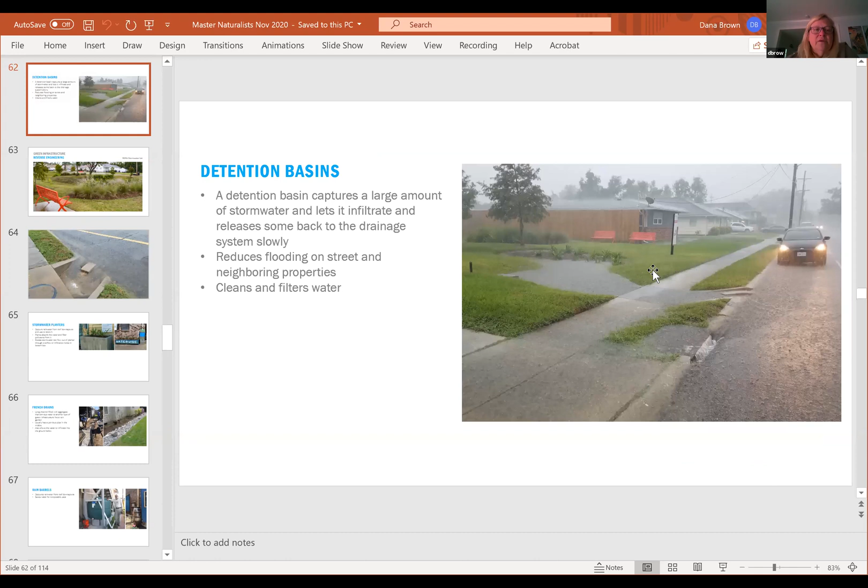That's awesome. We have another really good question building on these beautiful stormwater planters: what are some of the best plants for a rain garden? Well, besides native, of course—native plants. Your problem's going to be what can you actually get.

When we do design projects that go out to bid, we can get a contractor to bid for a large number of a certain type of plant, whereas you can't do that individually. So you can go to any of the places on North Shore, or Pelican Greenhouse at City Park—there are a couple others right here in New Orleans that focus on native plants.